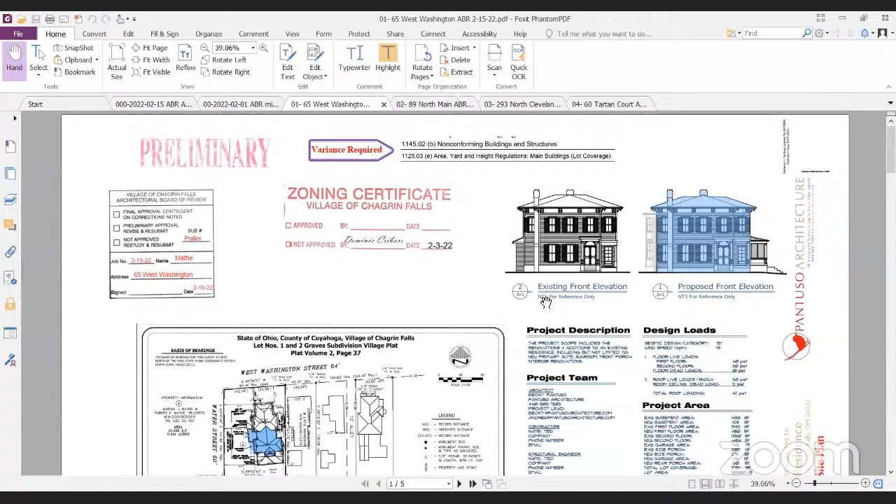So we are trying to find common ground on the additions to 65 West Washington. We've done analysis in the area. I think one of the initial reviews from prospectus didn't like the windows. There were a number of comments.

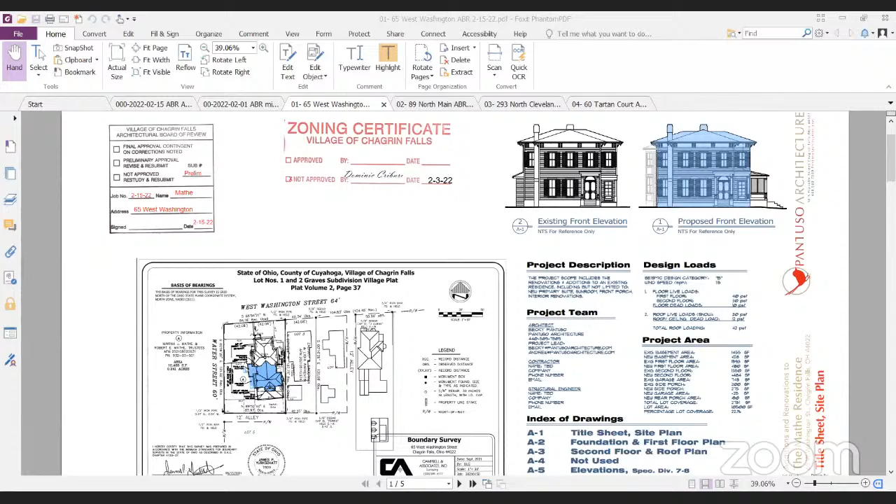We went back, redesigned. My takeaway from that meeting was you just can't do anything to this house, which is unsettling and unfortunate. So I'm really trying to come back with a proposal that takes into account everybody's comments previously. We're reducing the massing, it's stepped down considerably, as you can see from that elevation. We're not adding windows to the existing front, which I still wish we could. I think that's a very blank facade that could use another window, but ultimately heeding some of the comments of the board in this process.

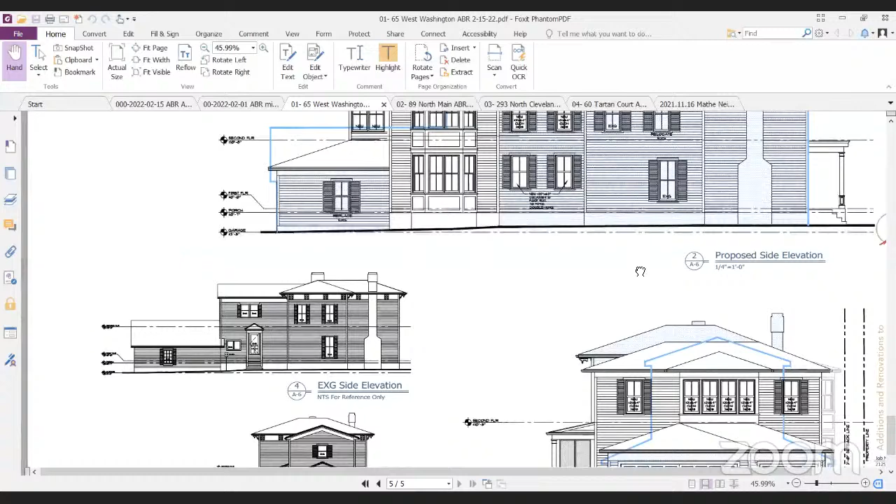Originally we were manipulating the garage, which is in the rear yard setbacks, and then foolishly didn't recognize that required a variance. Immediately, we took that off the table. But the reality is, the massing of that garage may be one of the most troublesome things about the existing house. It's really unfortunate. Sorry for all the background noise here, this zooming.

So really unfortunate, that 3A6 there, elevation. So just going in and trying to create the most attractive project that we could add to this village. And this is what we're coming up with.

I think the comments about the massing are a little bit tricky, because if you look around the village—and obviously I've done some soul searching since our last engagement on this project—that's what Chagrin is. It's like a big house next to a little house. Everybody on the board that's doing work in this village has seen the projects, you have like a $2 million house next to a $300,000 house.

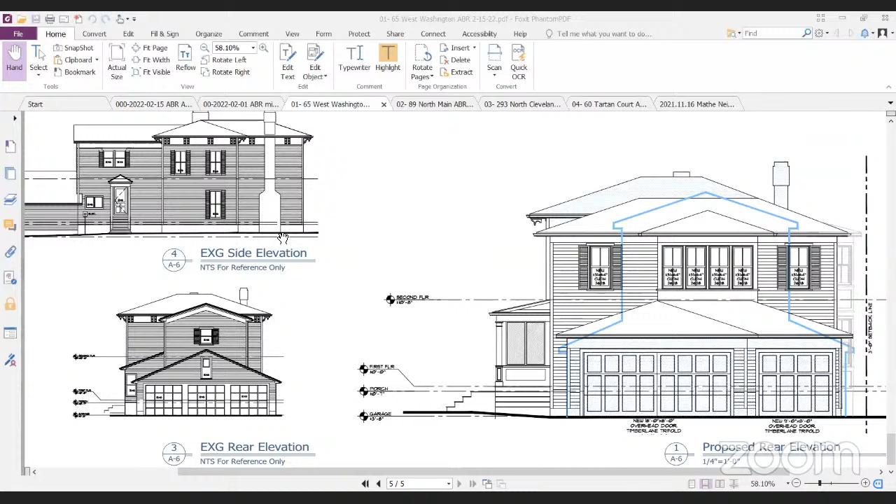And I think if you kind of keep that in the back of your mind, this isn't such a groundbreaking or crazy ask. So I'm bringing all that up because we went around and documented, we created a 3D model to visually look at the two. We did an outline study of this next to the neighboring houses. All of that effort brings us to this, and I'm happy to show you any of that exploration and analysis so that you can see why we've arrived here.

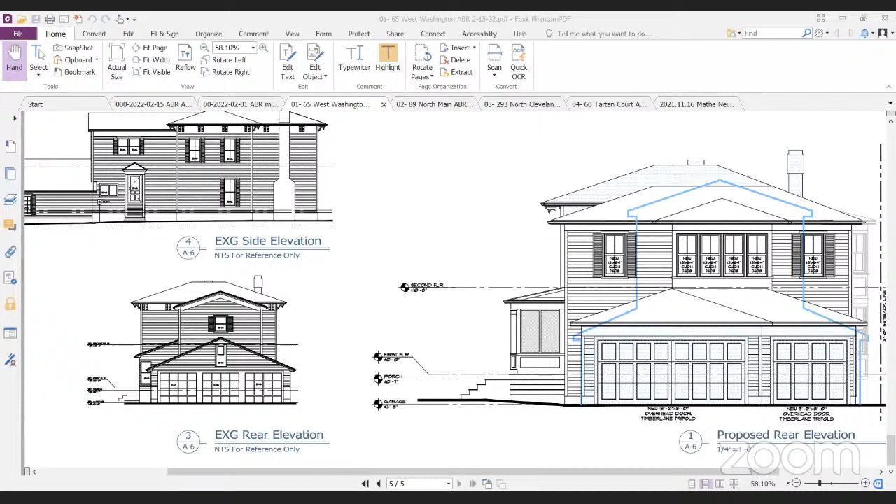But that's what I want to say. And I want to say, as long as each project is treated fairly and equitably, I can't complain about it. There's big houses going up all over Chagrin, so it's hard for me to decide to just surrender and say this one isn't acceptable. I think it's really lovely. I think it's going to be really charming, and we have someone that's actually willing to restore the whole inside of this house that's been unfortunately cobbled.

It's right there, you can see on 1A3 if you hang there. It's been cobbled up into a duplex on the inside. All the ceilings have been dropped to like 8'6" instead of 10 foot. This client is willing to go back in and tear that out and put in the big crown molding and all the things that were originally there. I just hate to see that opportunity lost for Chagrin.

Maybe I've talked enough. Well, I would say that they've shown their knowledge and interest in preserving architecture by the first submission, which is a total rebuild of this house.

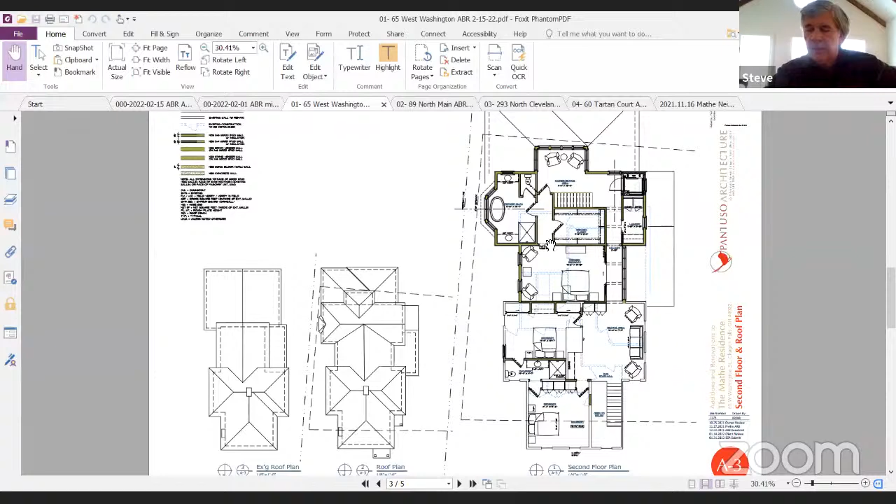And I'm glad they're taking a different tact internally, but we're outside people. Our outside architecture is what we deal with here.

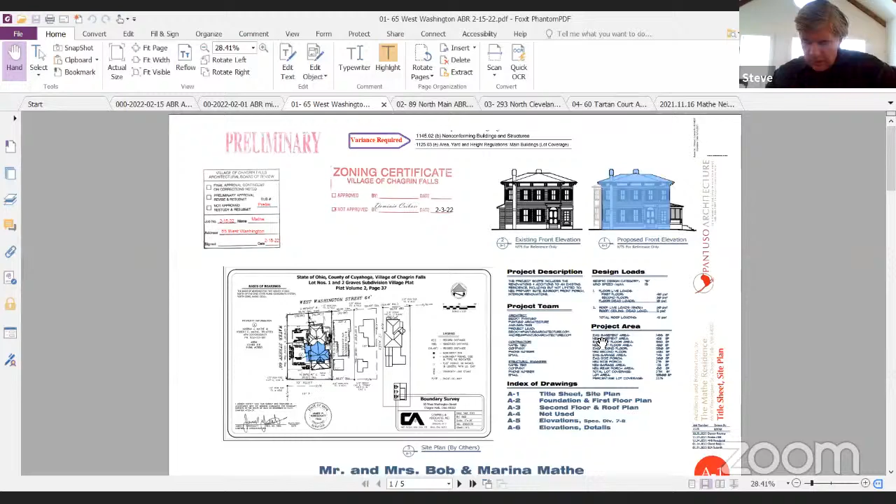Your quote, going to create a much more attractive project out of a house that can be done with the project. I think the basic tenet is this house has been added on to - it's had 4 major additions over a long period of time. Some of them not very noteworthy, and that has nothing to do with you, but we're adding on yet again to, at its time, a grand house. The day it was built, it was a grand house for its time.

And since then, it's been added on to be a grand house for its time several times. I think you're right when you say there's big houses next to little houses all over town, and there's houses that are too big and projects that should have been redirected all over town as well. But we're dealing with this house, and it's a substantial house already. And to try and figure out the best way to add to a house that doesn't need to be added to is kind of what I'm coming to.

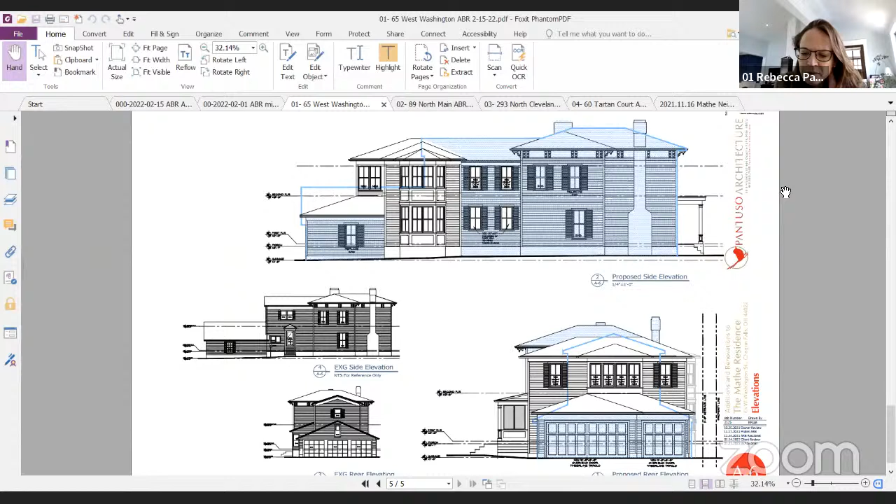Nothing's really changed other than representing it to us. I don't really think anything's changed since the last time. Not true, but not to any degree. Can you go over the changes and maybe touch on the existing and new square footage of the project?

Yep, if you go back up to this, if we go page by page or whatever you want to do, we've dropped... you want to start with the first elevation? Yeah, okay, great.

Originally we had the wraparound porch, which I think aesthetically would be lovely, but is losing some of the historic, the 100-year-old porch that's on the front there. We abandoned all of the windows in this far left side and are not touching either porch, even though in my opinion they're not designed well. So we're holding on to history.

And I appreciate that, but it's sometimes hard because the entablature is not the right size, the overhang is bad, the crown details - all the things that Bill refers to in that Get Your House Right book, they're there. They were done 100 years ago, so we're going to hold them sacred. That's fine, we're heeding your recommendations on that, not doing it.

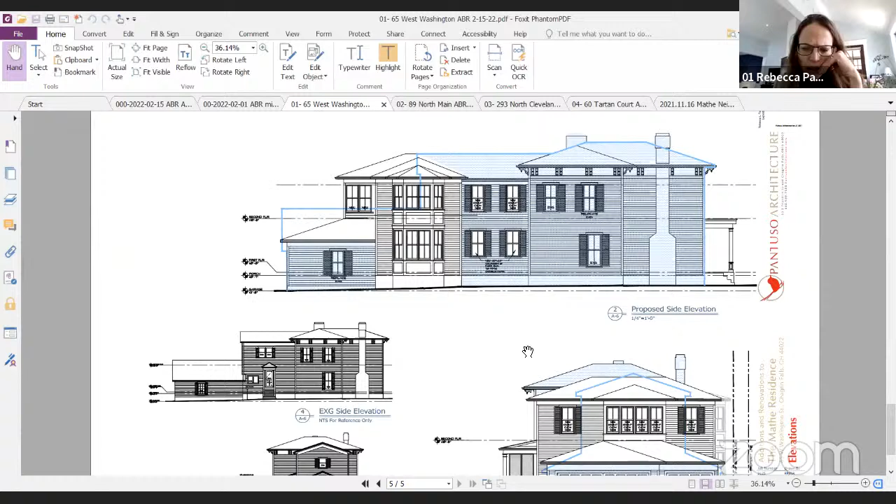And then on the back elevation, where the frieze board is - your or Phil's comment for how to handle the roofline, which we dropped down even more, and then putting that frieze board on there, I think was a good comment you guys made. And then changing the garage doors, changing the roofline, manipulating that alley elevation.

Becky, I really like where your design has gone, and I understand that you may or may not agree with the preservation part of this project, but you've shown, to my mind, a great effort to subordinate the addition, reduce it in scale, break it up in a way that is complementary but not overpowering the original structure.

It's meeting the needs of your client, and fixing the mistake on the end where the garage is, to my mind, a nice solution. It's there and you don't want to change it because it's a 3-car garage, it's useful and it's connected, but bringing that roofline down and hipping it, and adding the bump out to catch that and keep the hip from getting too tall, is, to my mind, very well done.

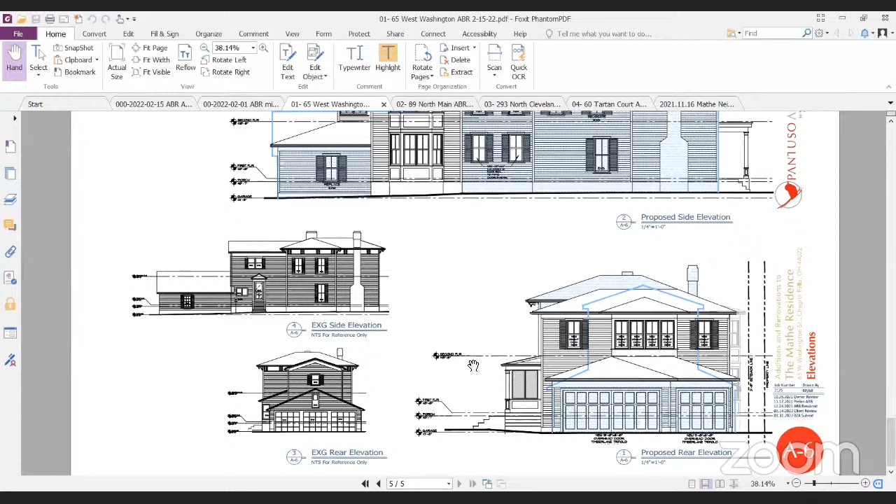So, thanks Phil. And the other comment I didn't mention is on this 2A6 elevation, we took all the windows off of the existing on that as well - we had windows on each side of that fireplace.

Yeah, I like what you have - it respected the historic integrity of the original massing. I mean, that's definitely a big improvement. It obviously helps the board look at this and not get caught up in that aspect of it.

I think there's something that's not right in these two elevations. The roof coming over to that last projecting bay is actually bugging me - the roofs don't coordinate between the side elevation and the rear elevation. In other words, the roof of that bay looks small on the rear elevation, but it's actually a taller roof on the side elevation. There's something that's got to get reconciled there.

But I think the approach to the side-facing hipped mass, doing something that goes sideways like that, kind of mirrors the same thing happening on the main house - the loweredness - all of that works.

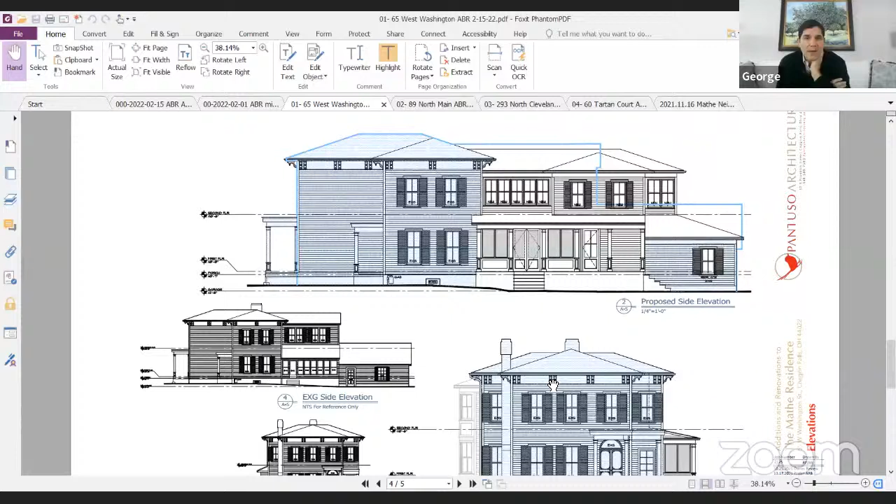And the fact that it's so prominently placed, the side elevation is the main elevation on Water Street. So I think the sensitivity is, and you're respecting the main house at this point in the design - that's important. But I think the sensitivity is that the Water Street elevation...

It's not unrelieved, but what you're showing us there is longer than the original house. So if there was no little back bay and everything got compressed back to like 4 out of 5 of those porch bays, all of a sudden it's just too long - you dropped it, and that's good, but it's too long to feel subservient to the main form. That's what I think Bill's trying to say, that it's still overwhelming the main house.

So if you look at the other elevation coming down Water Street, your back elevation - keep going - let's see, if you look at where you have outlined in blue, look how wide this is. What is that, 40 foot or 36 foot? It's super wide there.

And you're gonna feel that when you're coming down the street, how massed that is and how long it is. And the house you're referring to across the street, that probably contextually fits because that lot's 150 or 200 feet wide. This is a 50-foot wide lot in the front, but you're comparing the front elevation to the side lot line.

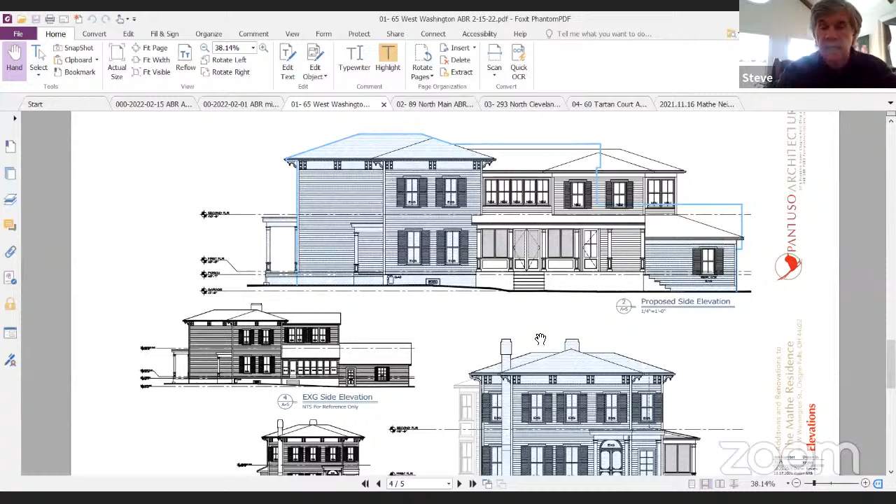Substantial change, and the question is, what is too much? That's the summation of last time's decision: this is just a little too much. Very well done, a little too much. And I'm trying to quantify that.

To me, the 5 bays of that porch are too much. I feel like the porch is 6 to 8 feet too long. I think the 5 windows ganged between the existing house and the side-facing hip, that's too long. It should be 3, or it'll be too squished. Or 4. If that thing slid back 4 feet and you didn't have that glass bay, I think all of a sudden this thing is better.

So I'm just trying to quantify it. Like the porch is 6 feet too long, but the mass is about 4 feet too long, and all of a sudden it'll start looking shorter than that house, and it's going to be a good thing. But right now it still looks equal to the main body of the house. It's doubling the house. The old one was only two-thirds as long as the house, and that's the difference.

Tell me what you would do with the garage, George, because you're not addressing that as part of your comments. To reduce that gable, I need to hip this. In order to hip this, I've got to build something over it to make it work. You're shortening it because you're still going further — even if you followed my suggestion, you're still going further than the existing addition, so you're shortening that thing.

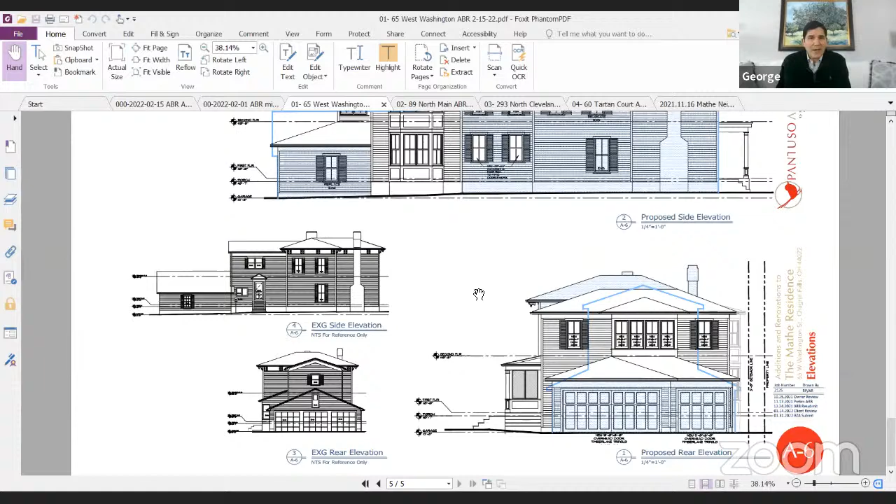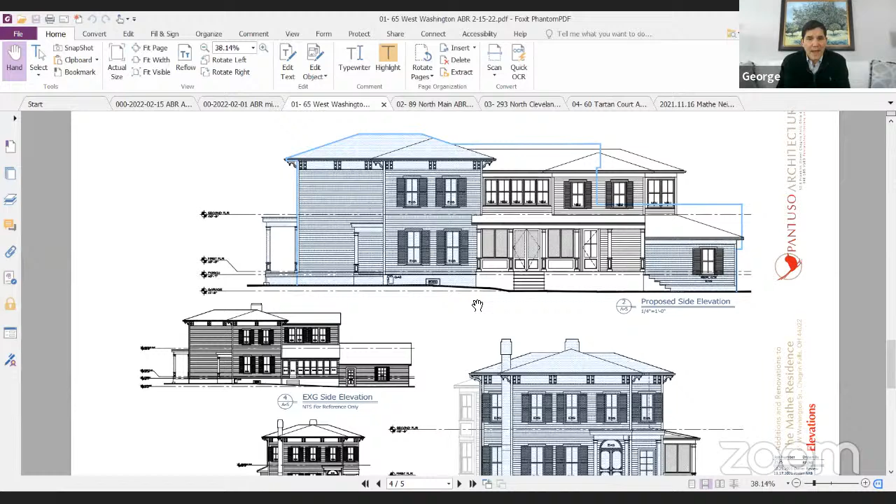That length you're seeing that solves this whole garage bay is set back like 18 feet, and it's like 60 feet from the road. I'm saying you're still making that 2-story addition too long and the garage a little too short, but it's just a matter of going back and tweaking - hopefully this client can make a room a little smaller. You never answered the question of what's the square footage of this proposed house. We will see if she can reach that solution another time.

I move to revise and resubmit. A second. Motion by King, second by Childs.

Lutz, can I ask a procedural question? Sure, I'm sorry to interject, but it has bearing on this. This has already gone to BZA because I need to acquire a variance for improving this garage.

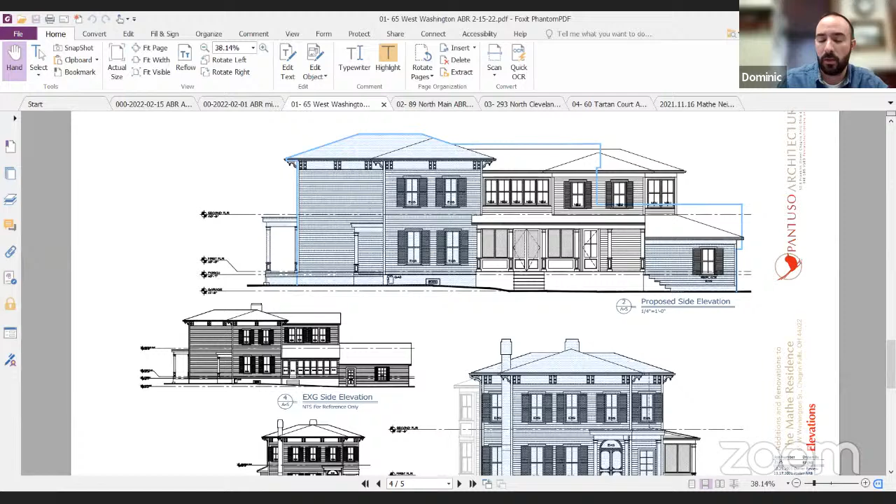Your revise and resubmit, how does that impact that next step? You're still going to proceed to BZA for the variances, and with the comments made from the board, they'll take the minutes of this meeting into consideration. If any board members want to make comments in their motion to the BZA, now would be the time to do it.

I think we need to make sure all the minutes from the last 2 meetings are handed off to BZA so they kind of understand and follow the sequence. That's of paramount importance. Revise and resubmit isn't a decision other than to see it again, so I'd love for the BZA to listen to these comments. I think it would be helpful.

When it's on Zoom, they can watch the whole damn meeting. I think it's important that the motion includes the things that we think could be done to make this addition better, and I think that will make a different motion than the last time this house came before us.

George, would you say what we think the garage needs to be - a different slope? Because I still want to know how you're thinking that's resolved. Everybody agrees there's another way to do it besides building over it or shortening it, but I don't think that's a good discussion for today. I'd be happy to talk with you about it anytime though.

Carry on, so I want to go back to the motion to revise and resubmit. Motion by King, second by Childs. Lutz, aye. Before you do that, I just want to make sure you get the minutes in for the last two meetings while we're revising it, because we're going round and round as we should.

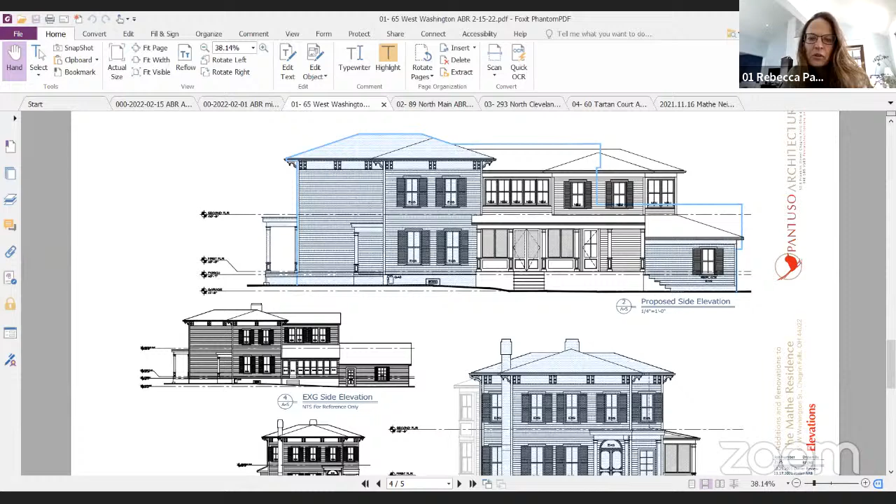We looked at this, and I'll show you all the ugly options - excuse my language - that we can do that offline.

A couple days ago we had 2 inches, and it covered up all the soot, all the dirty snow. Who are we listening to?

So we need you to revise and resubmit. We obviously have made mistakes in the past, and we don't want to build any more ugly stuff. So let's revise and resubmit.

I'm calling the question. Second it. Is that what you're asking, Steve? A second for revise and resubmit? Yes. I think we already had it, actually. I'm calling the question, meaning we need to vote. Motion: revise and resubmit, motion by King, second by Childs. Lutz, aye. Childs, yes. King, yes. Thank you.

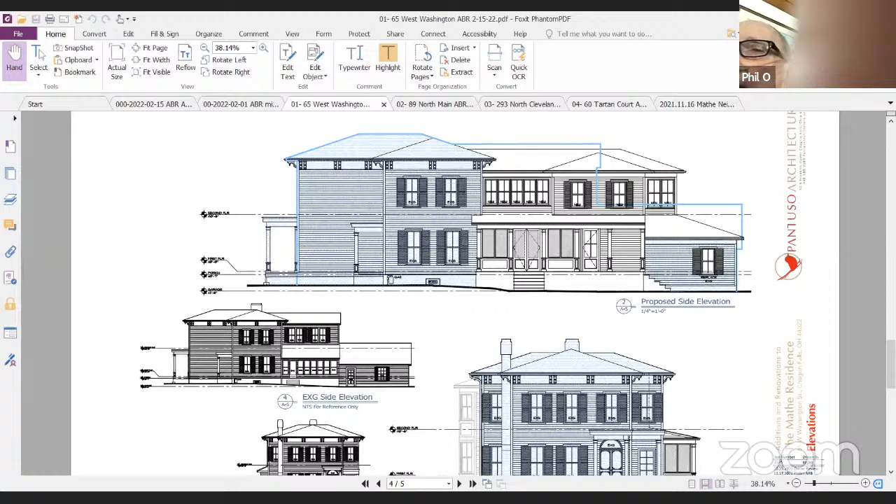89 North Main Street, Elite Sotheby's. You fill in, I have him muted. I didn't know if he clicked it, I didn't know if he joined the meeting.

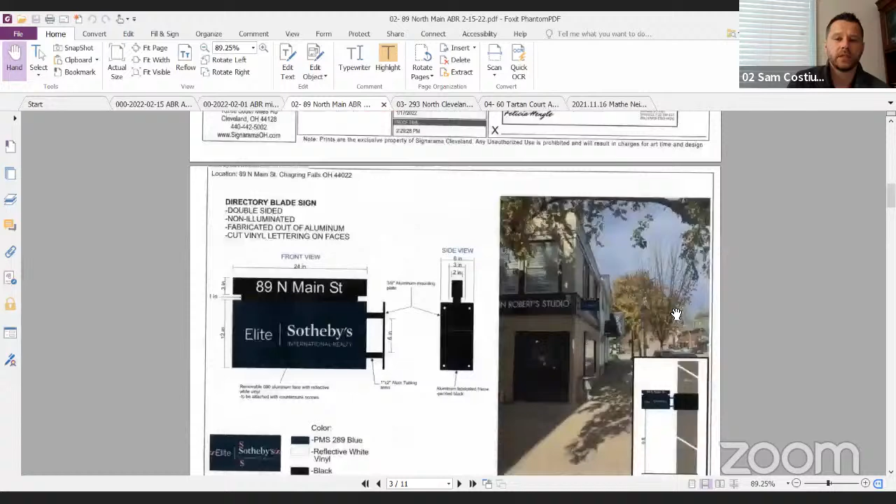Can you hear me? Yes, we can. Please continue. My name is Sam Costiuk, I'm with Signarama, the sign contractor for this project. We're proposing to install a small panel sign by the entrance door of the new Elite Sotheby's - a non-illuminated aluminum panel sign - and also a directory sign facing Main Street, also non-illuminated aluminum construction.

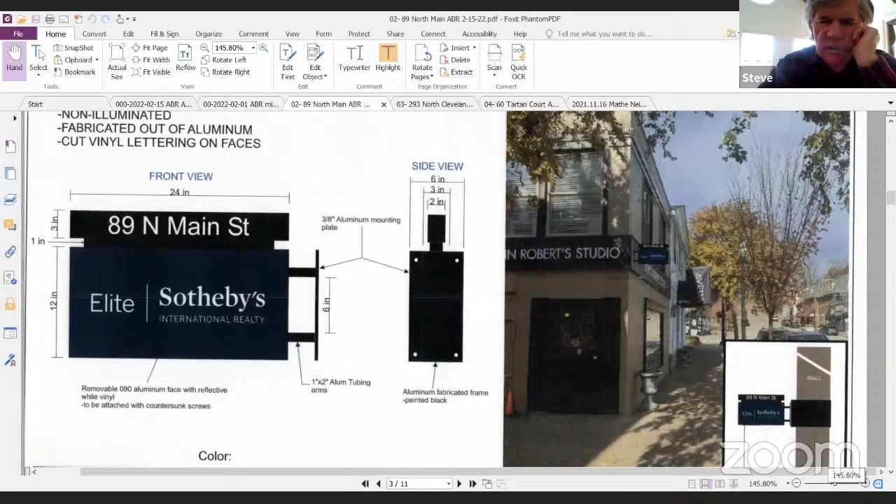So you're replacing the John Roberts studio sign? We are not, it's going underneath it - well, not exactly underneath it, it's going on the corner of the building, right here. It either needs to go on the sign or above the sign, because they measured underneath it and the lowest point would only be about 7 feet 6 inches, and we need at least 8 feet. So that's the lowest it can go, or it has to go above it for zoning.

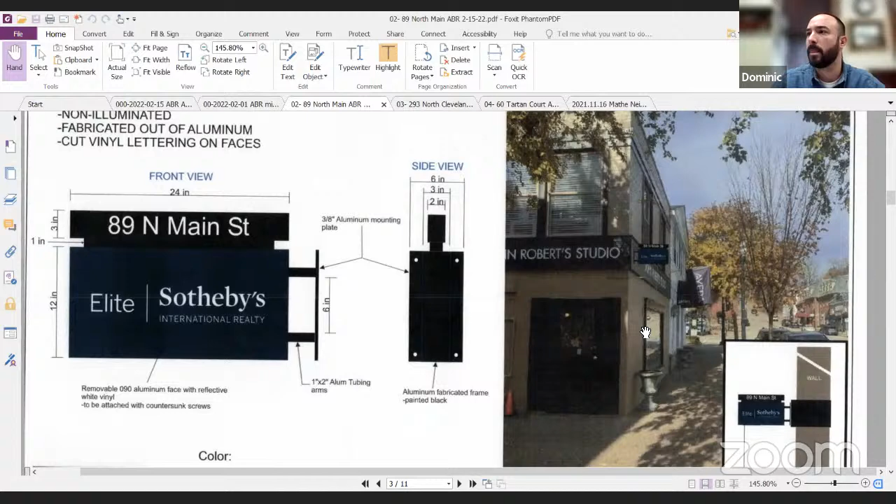I think the sign's a little boxy. Could you make it more of a panel sign rather than a box sticking out? Is it like 6 inches wide, projecting out, or am I misreading that? It's projecting out over 24 inches.

Is the sign blade 6 inches thick, 12? No, I think in this rendering the mounting plate is 6 inches - it's hard to see because of the darkness of the color. Is the sign 2 inches thick? The depth of the sign is only 3 inches. 3 inches, okay, okay.

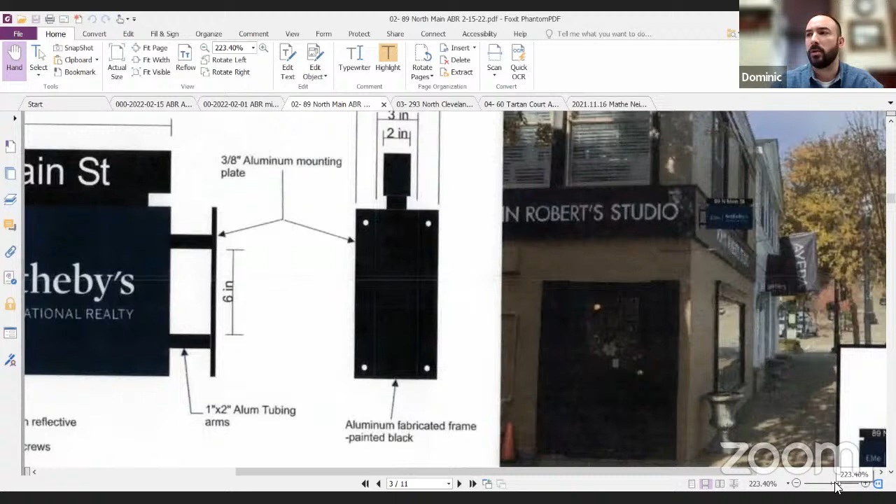If it moves, it feels like it needs to move up, but I almost feel like it needs to be bigger if it moves up. It can't be any bigger because of zoning. It's got to be a 2 square foot directory sign.

What if you put the bracket above the John Roberts sign, but then arms came down so the sign could be at its current position, suspended from above the John Roberts sign, not attached to it.

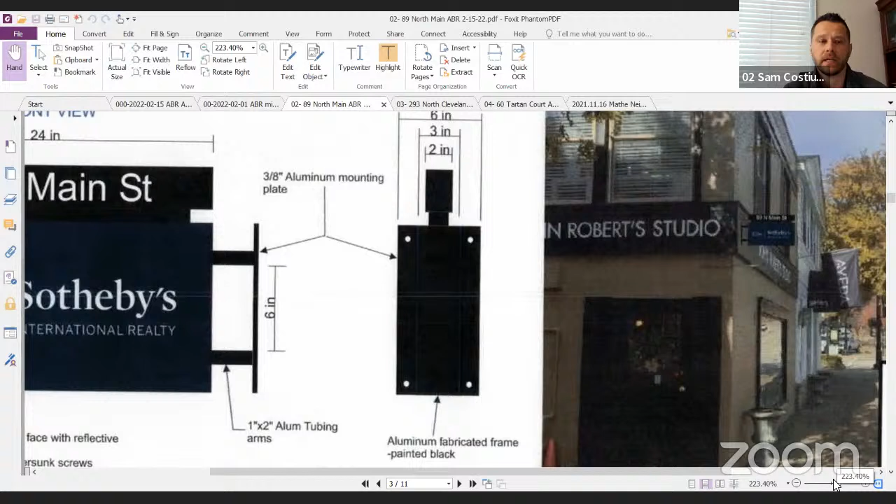We had actually gone through many different designs, one being more like a scroll bracket that hangs above the sign with the panel hanging underneath, but the client rejected all those designs. They wanted a more high-end, slightly more modern look to the sign, maybe a bracket that's not a scroll bracket, something more modern and geometric. They just didn't like the whole panel hanging underneath.

I believe there was another sign or two with a similar approach where it wasn't hanging underneath some sort of bar. Up and down Main Street they had seen this and wanted something similar. I think the other problem the client was running into was their sign needs to go through corporate first, and they were getting a lot of pushback from corporate on some of their other designs that we had recommended.

So did corporate approve this? Yes, yes. It's small. We agree, but according to zoning this was - we had actually submitted a larger sign, but it was shot down by zoning, and that went to the board. I mean, it's not going to be a big thing up there.

I hate to move it up at this size. I mean, it's just going to look odd if it's way up there. I agree, so maybe this is the best solution. Yeah, that's kind of what I'm thinking too. I mean, it's not offensive. No.

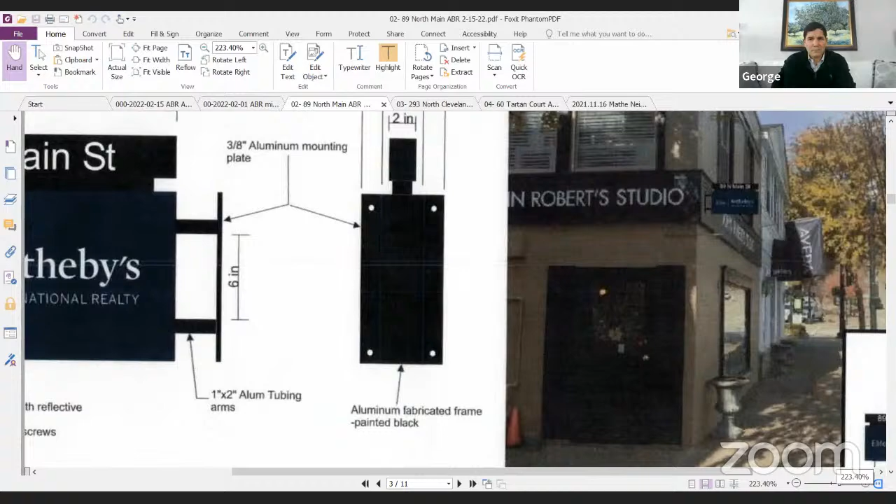It's kind of too bad because it gets a little bit lost in the John Roberts sign - they're so similar, black on black. And it also blends in, so not bad from our standpoint. There's also the sign on the back, might be a little confusing, but I don't object to the design of it.

I'm sorry, Dominic, you were saying? Oh, I was just mentioning there's also the sign on the back, on their main entrance on the alley side of the building next to their door. I just want to make sure you guys had comments on that too.

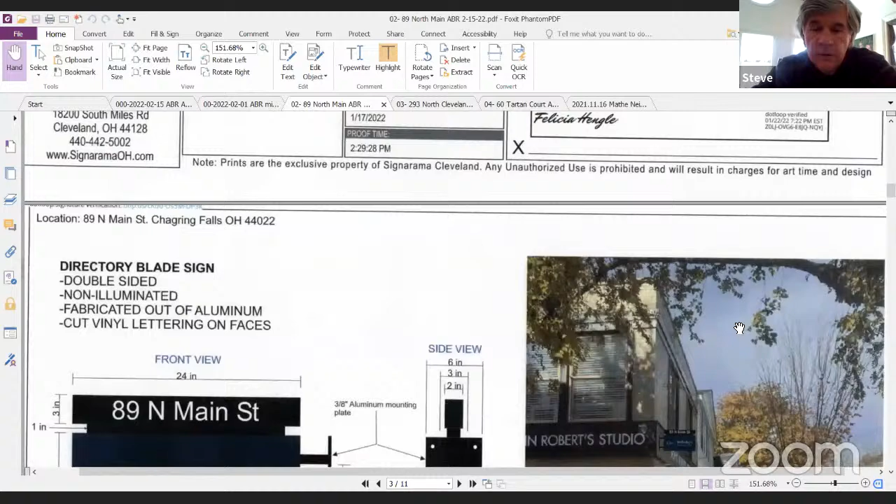It's unobtrusive also. I mean, I would approve these myself. I think so. Yeah, I agree. Me too - it's confusing, but appropriate.

Are you saying we're appropriately confused, Steve? Well, I was for a long time because that bracket thing, I couldn't figure out what that box was, and it's just the bracket on the wall.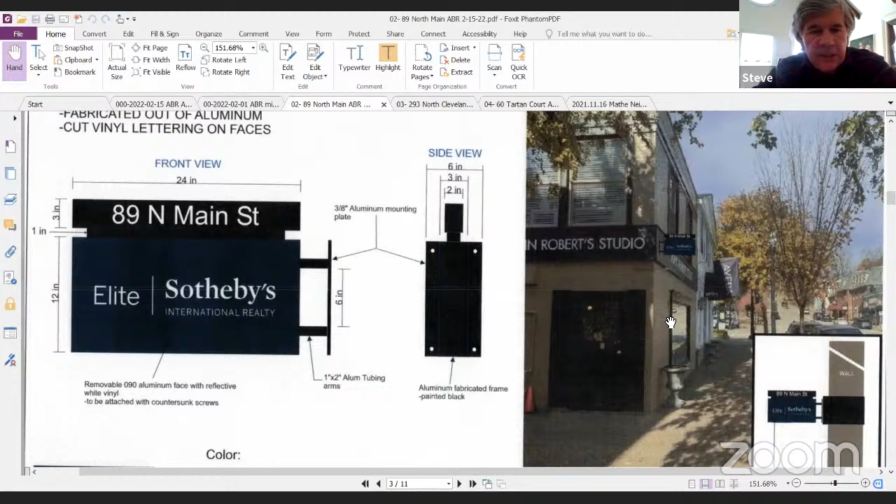I moved to approve as presented. Second. Okay, motion by King, second by Lutz. Childs, yes. King, yes. Lutz, yes. Thank you, that was easy. Thank you.

293 North Cleveland Street, new dwelling.

Remind Bill, you got some plan review. Lauren and Rodney, are you on tonight or this afternoon? Morning. I'm not sure I see them today. I see Lauren Sonkin is on here. Jeff Sockett's here too. I am, I was muted. Okay, that's fine.

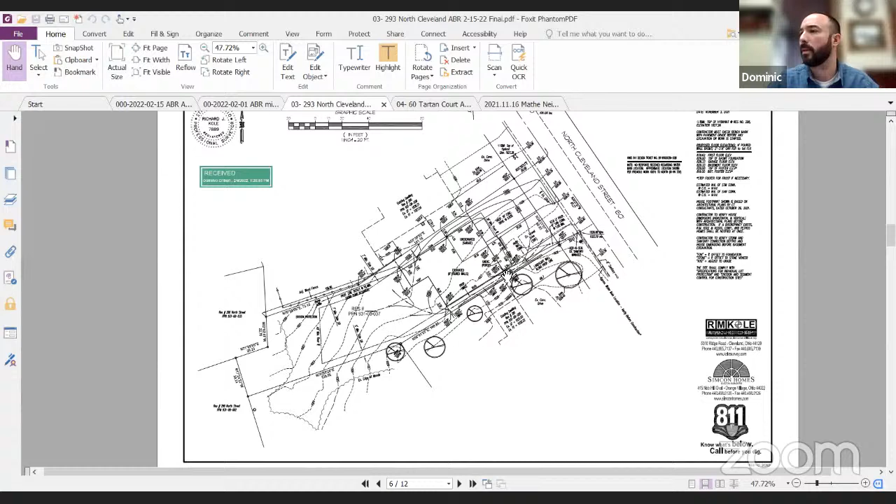Just some comments on this, just for you, Bill. We did receive a plan review response from RSA. I'll be sending those out to you after this meeting. And also the engineer is still writing up a response for, I believe, the drainage. So those are forthcoming here soon.

Dominic, thank you, we understand that. Just bear with me a second.

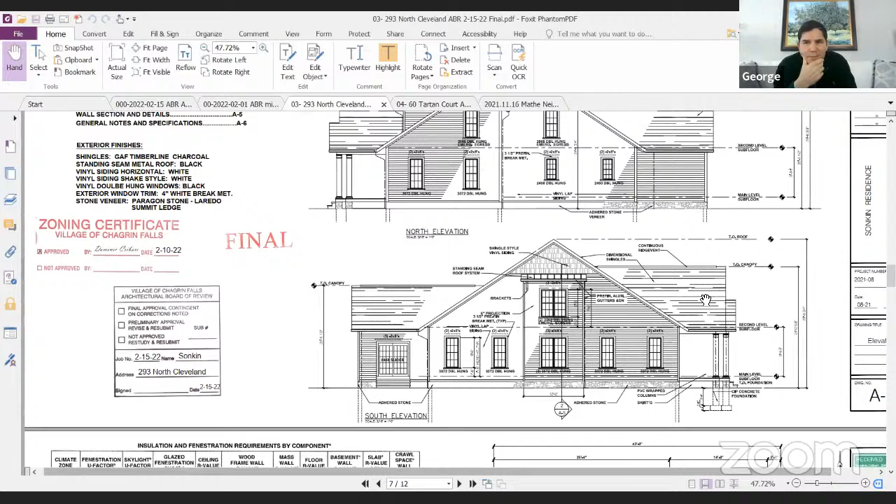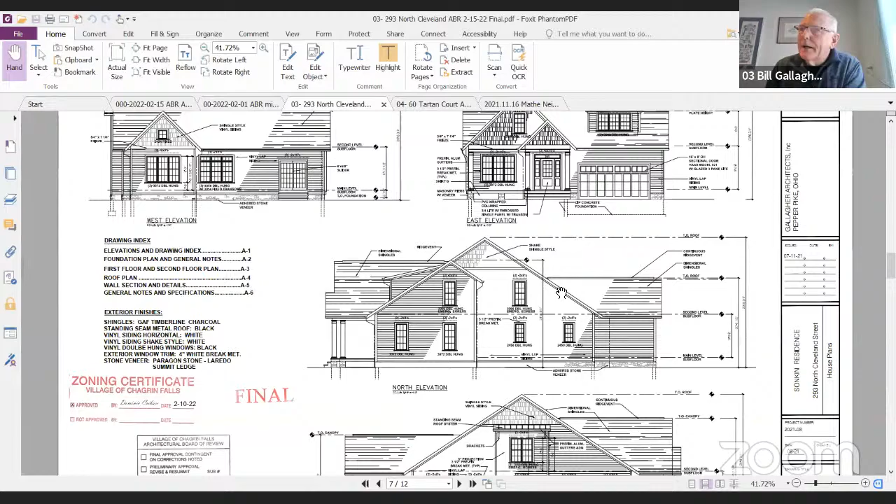We've looked at this design at a number of meetings and really appreciate the opportunity to discuss some of the changes. I'm pretty confident this is exactly what the board has been asking for as far as the exterior and materials. We did submit a color palette, and actual samples were also left at Village Hall for the board to see.

The last comment, which was a major one, was to get more definition of what the materials were on the drawings. We understand that—it was simply because we're still evaluating and costing things out. After some long discussions, and since our last meeting was probably January, we came back with what was selected by the homeowners and wanted to present these.

Now, that shake siding is actually white. I'm not sure why it shows up so taupe in this—I think it's just the lighting of the picture, and it's picked up some yellow. The stone is also a natural stone base that's going to be associated with that.

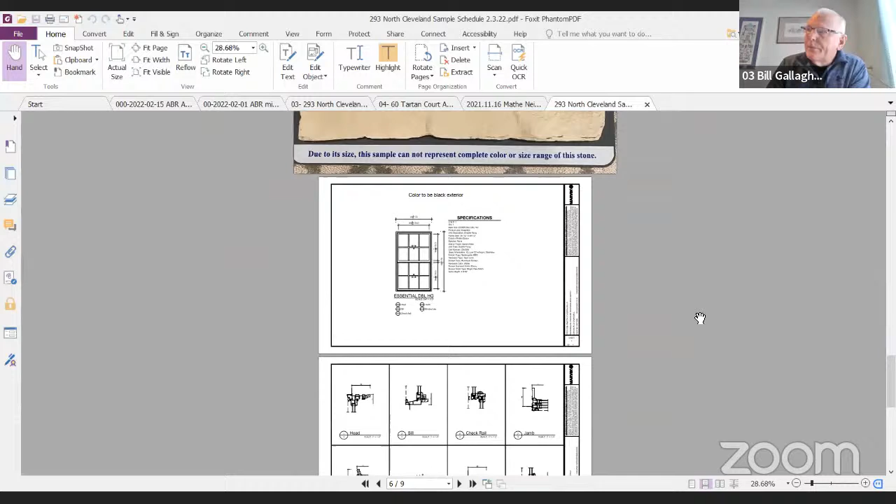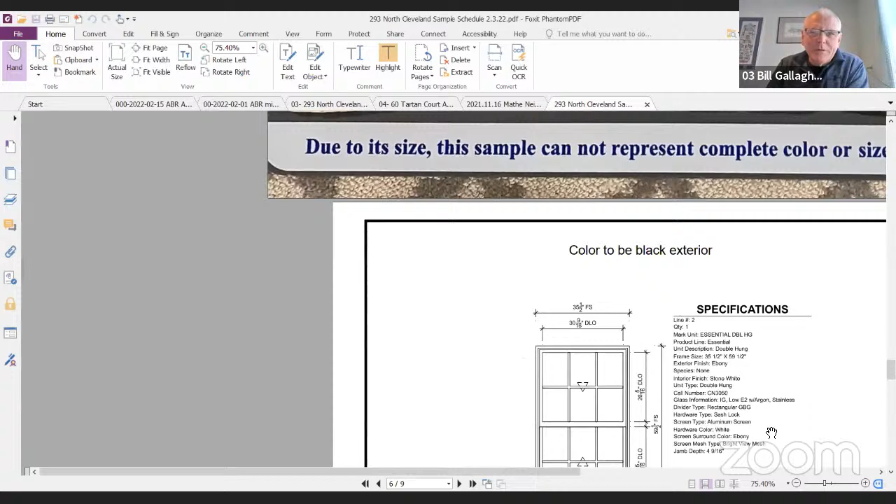We are putting in fiberglass windows. One point of discussion I'm sure we'll have, so I'll bring it up now: the homeowner, particularly the wife, Lauren, is very strongly opinionated that she wants black windows. We can go into those discussions later, but I'm just telling you up front.

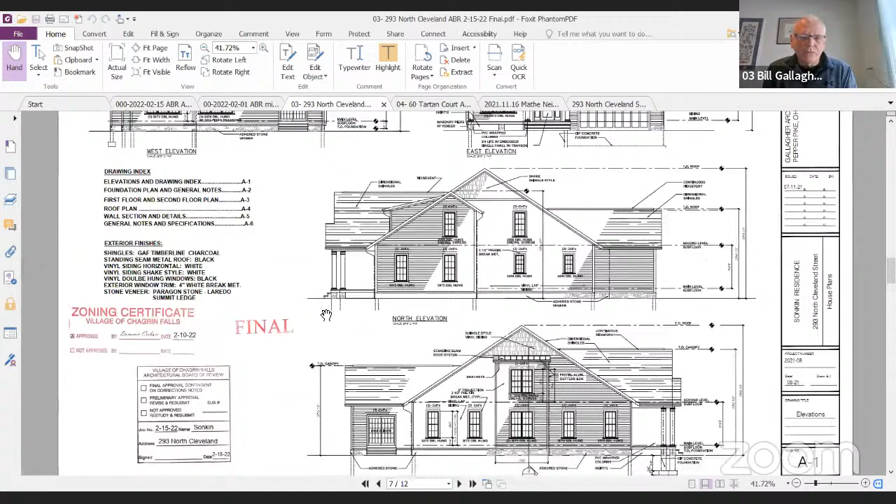Secondly, the roof design used to have a couple of gables, and we needed to tie everything back together, so we changed that to a shed roof at the last meeting. We've decided to go with a standing seam metal roof that will be a complementary black color to work with the windows. On the west elevation and south elevation, we put a standing seam metal roof over that small projection to give continuity throughout the entire design.

The rest of the house—the trim, garage doors, possibly the front door—we haven't discussed that color yet, but everything else is going to be white. We're hoping this is what the board's been hoping to see and asking for, and we're here to listen to your comments.

So the metal roof is only on that little shed roof and the front-facing dormer, and the right-facing dormer. There's a shed roof on the front, and then there's a shed roof on the side.

I'll go first. My comments are, first, I'd like to thank you for taking all the time. I know you've been here two or three times, tweaking and working with us, so I do appreciate you doing that.

My only comment, because it's the front elevation, is that you have a lot of field right here—I think I brought this up at the last meeting. Is there any way, with all this distance here, to either bring this roof down—let me try to draw this—so you could put a beam here with a bracket and a bracket, so it doesn't have all this height, or put a small hood over here to break up the facade, since it's an important one. Maybe even a small roof out of copper that goes across, comes down with a bracket, so it breaks up that large mass of siding above. But other than that, I think it's a nice job, and thank you for taking the time to do it.

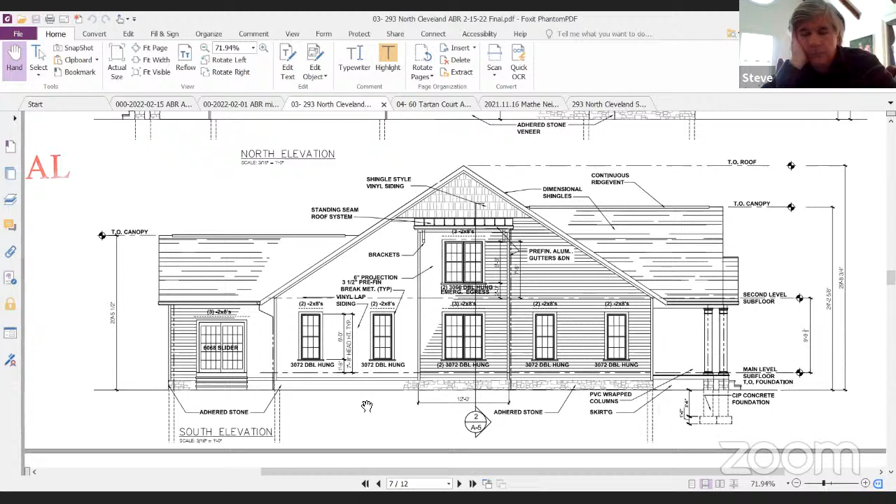This side facing gable still feels pretty wide to me. I guess that bay feels a little wide on that side, but it's certainly become much more consistent. It faces an equally long, not terribly articulated house next door on this side.

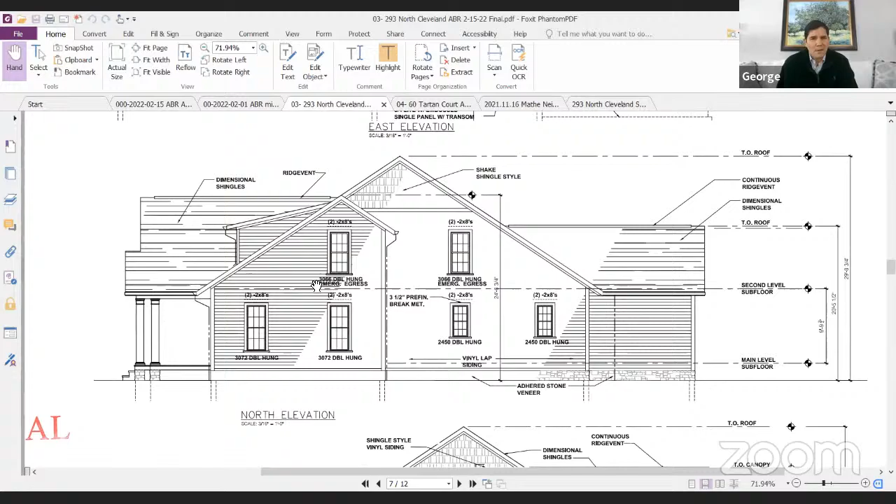So I don't think there's a lot you can do with a house this big on a 60-foot lot, and it's not really even a 60-foot lot. I'd like to say it's much improved from the original presentation.

I agree with Bill, if there's something you could do to break up that space between the top of the garage doors and the roof line, to give that some relief there, that would be beneficial. Dominic, could you go to the...

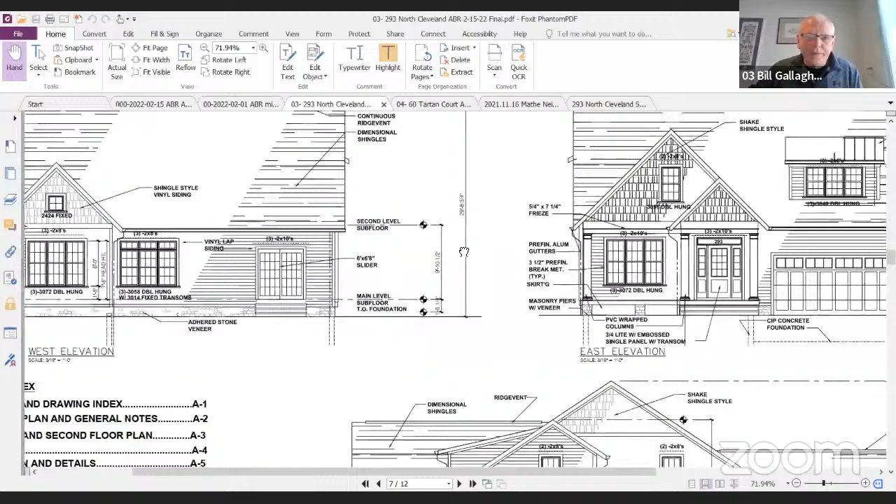North elevation, I'm sorry. I mean, your comments are great and I'm not at all trying to minimize them, but in looking at that elevation, by projecting that roof and having the gutter board not align with the porch, honestly, it's bothersome to me. I understand what you're saying, or then we could step it.

Okay, so then we step it, and then where's that awkward step happening at? It's going to happen somewhere in the middle of the garage door, and you're going to stare at the end of it on the porch. Even again, good point. And then it becomes a problem.

I think if you just - I agree, maybe it doesn't make sense to make that this right here. Let me just annotate real quick. Instead of bringing this side elevation down, maybe that's not the right answer, but maybe what you do is just give that relief to that elevation - maybe you do a simple little hood here with a beam, and then you put a bracket here. And even on the side elevation, it gives it a little charm and character.

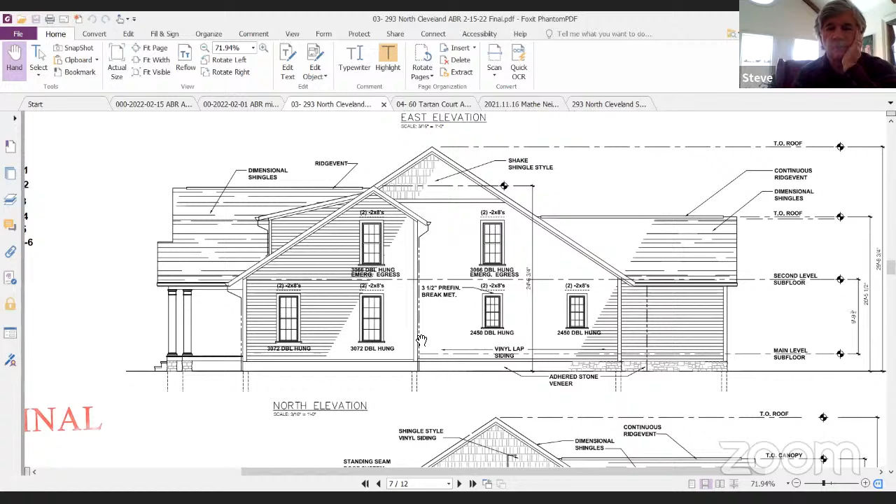The samples for the shakes are at Village Hall, but what are they? Is it vinyl? It's shake? Vinyl, okay, it's just siding, vinyl. Vinyl siding, vinyl shake.

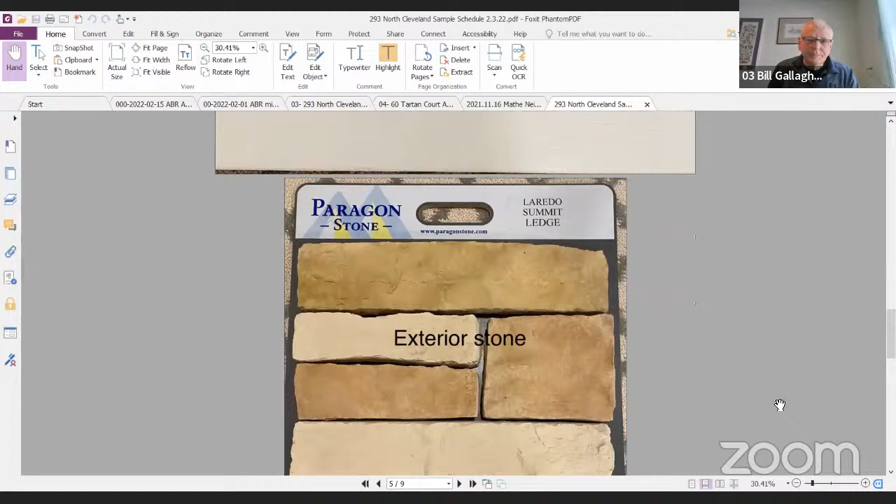The design is well done, and would look very nice in town, but with the material selection, I think it's going to look like a plastic house.

We appreciate that comment. Our adjacent houses are vinyl, and I think it fits well into the community, especially this neighborhood. I do know the owner has said to me over and over they will consider it, and it all comes down to the cost. Unfortunately, that's one item that may add substantially to the cost of the house.

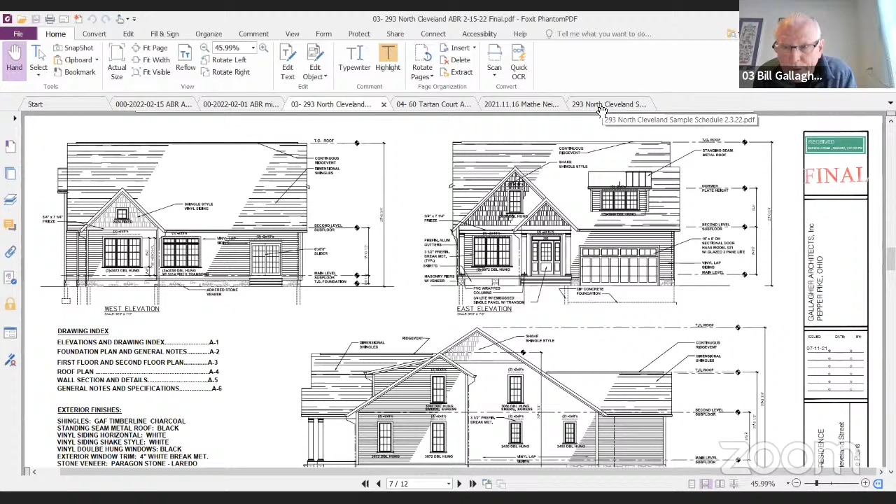Do you have the window casings called out, and what are they? Yes, we do. If you look at one of the notes there, it's brake metal, 3.5, pre-finished. So you got aluminum wrapped, but you have 3.5-inch trim. Then what's the subsill?

It does look like it's a subsill, which I'm glad about. Yeah, the subsill is part of the window system. It is going to be aluminum wrapped also, and obviously the windows are fiberglass. So can it be like a sloping 2x aluminum wrap below? That's pretty typical aluminum wrap detail, 2 inches thick, 1.5 inches thick.

Right now we're not showing the skirting underneath it, simply because it's more of a traditional design. I don't mean an apron, I just mean the subsill itself. If it's aluminum wrapped, there should be something there - it shouldn't just be the bottom of the window.

That will not read - I mean, your drawing actually shows a subsill, but I'm hoping it has a little presence. I think you want it to be thick enough. I think what George is saying is, when you do a sill like in traditional houses, there's a little bit of slope here, and there's usually a kerf or a drip right here.

It goes back, it comes here. Usually this distance here, from here to here, is usually 1.5 to 2 inches. Again, it just kind of gives it the character and feel of an older house. Isn't that what you're trying to describe, George?

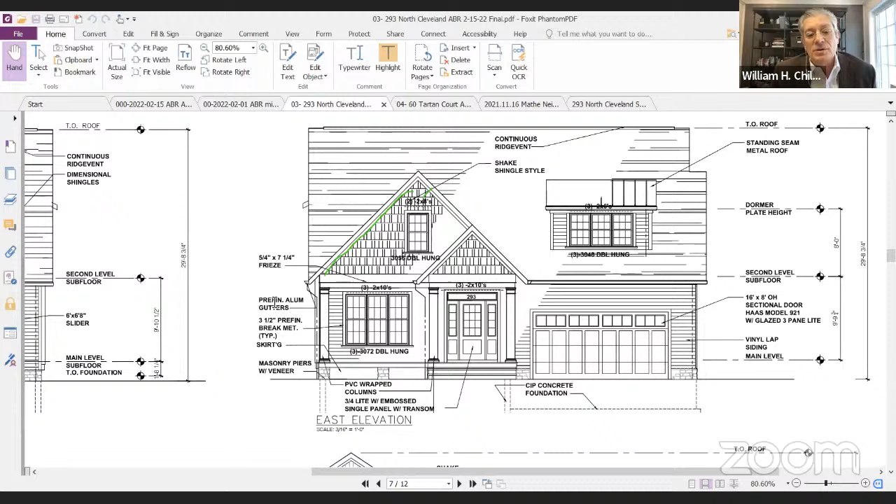So if you do go this direction, I highly advise you to really think about all those details, because you only get one shot at it, and after that you're going to be looking at it for the next X amount of years.

We're actually here to approve certain things, and we don't need to advise. I mean, how will it be built?

I agree, Rodney. You can see there are corner boards at the corner. They're probably not as prominent as shown on the reverse shed dormer. You can't see there's a rake board there because it's projected, and behind it you can see the rake board at the gable that Bill was showing. You'd see how it terminates down at the frieze.

I agree with Bill, you don't want J channels at the terminations. We do have complete wraps around here, so it is, in my opinion, appropriately detailed out. There are no J channels on this house - I don't see any on the drawings. I can't imagine where they may terminate.

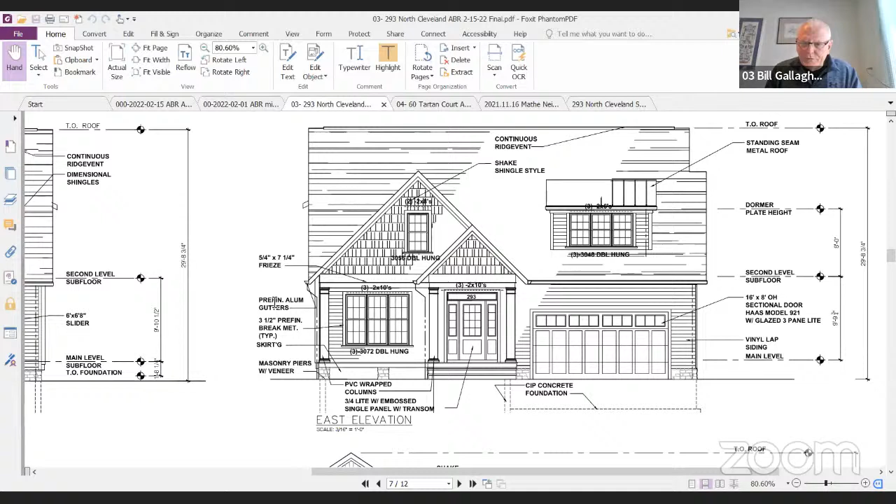You can see there's frieze boards up there. It's going to terminate against the frieze boards. You can't see them because it's hidden behind the projected overhang. We do not have a speculation.

I mean, these are plans, we're trying to approve a house that's going to be built.

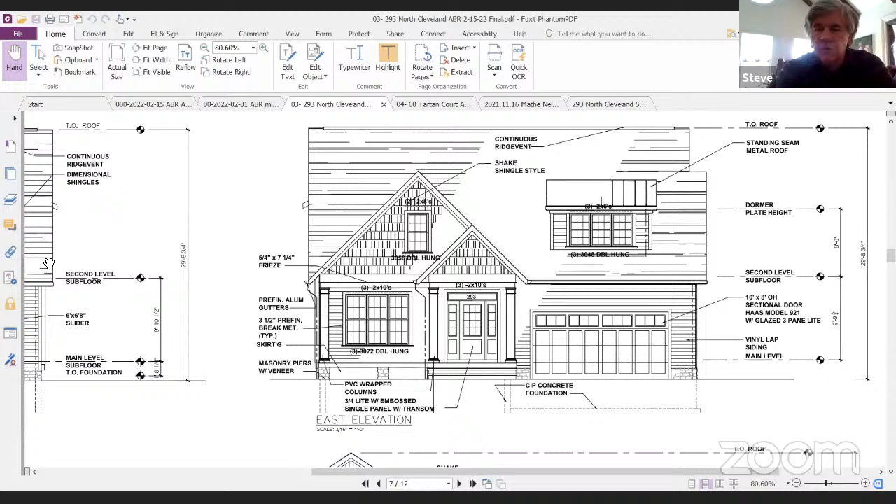I guess I want to hear what the glass is going to look like, and whether it's going to appear like a house on the cheap. You're trying to go down to the details in the drawing set - is that what you're asking? Let's look at the details in the drawing set if that's what you're looking for.

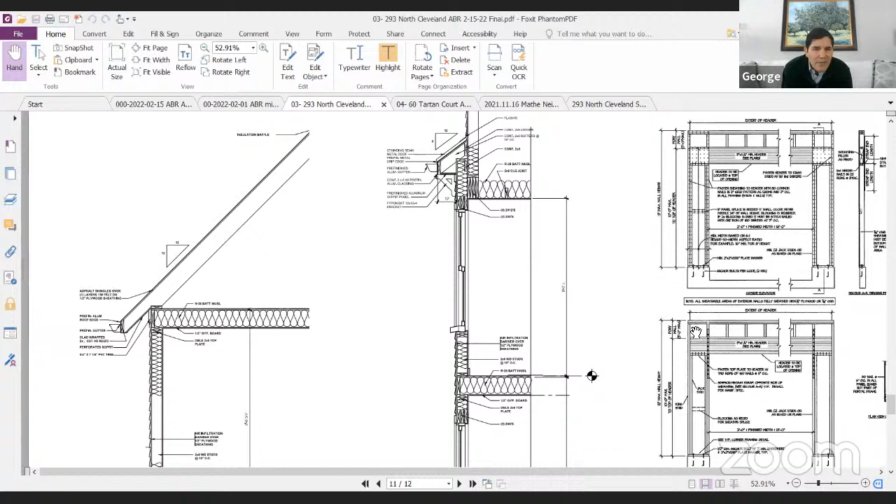Can you go back to the wall section? I'm sure we don't have any details specifically showing what you're asking for. There's a detail on the window corner boards - it does cut through a window. It cuts, and then I don't know if we have a rake projection shown. We do have a frieze board shown below the eave.

Right, and you do show that we don't have a horizontal soffit - we're basically cladding the underside of the rafters. There may be a J trim there because you have to terminate it against the frieze board somehow.

That bracket - you've got a pre-finished aluminum soffit panel, which is not great, but then what is that bracket under?

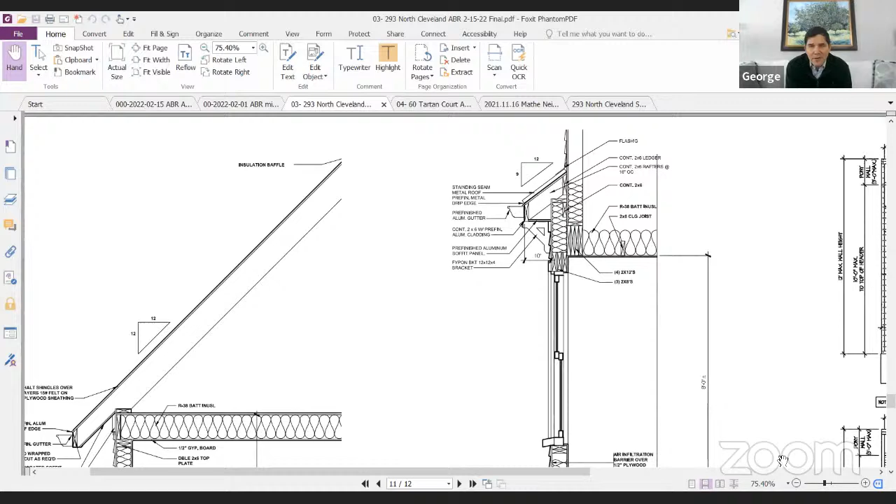Well, obviously it's a Fypon product that's called out, so it's a manufactured system. I don't have the product number identified. We can provide that, but I don't remember where it is on the house. It's that shed dormer - the two-story dormer that sticks out on the side elevation, George. Got it, thank you, yes.

There's a 6-inch projection on that side elevation, the west elevation, to break up that detail a little bit. And then we picked a manufactured product to trim it out a little better.

I guess I'm looking for some confirmation from perhaps one of our architects on what the installation is going to be. These means - the vinyl trim siding can be done many ways, and some of it's just not very appealing. This is a cute house, but with materials involved treated wrongly, it can end up being less cute than it should be. This is more treated in a typical way based on these drawings, excuse me.

Aluminum soffit - there would be a J bead on these, and as drawn, there's nothing showing. We're doing aluminum wrap trim, which doesn't allow for some of the trickier details with the siding.

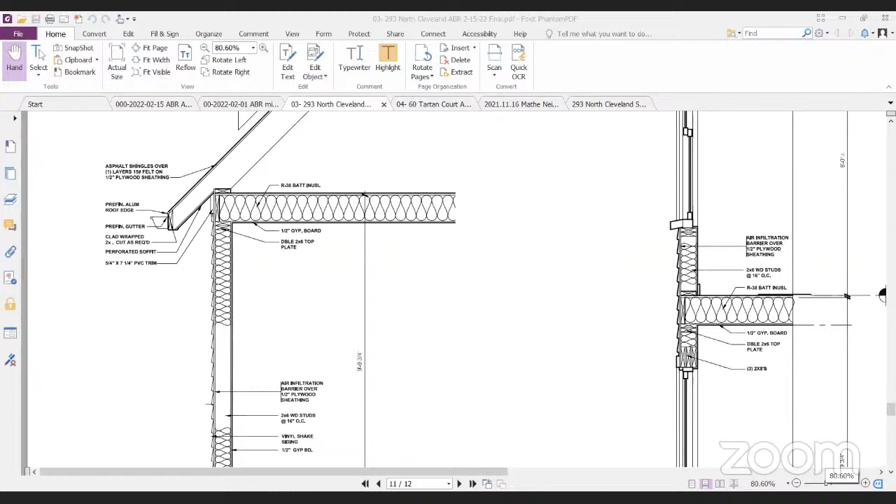That'd be great. So when we do the wrap of the casing around the window, and I understood everything you were saying about the sill, and I heard Mr. Child speak about maybe a pre-made AZEK sill. That is definitely something I would look into as well. I'd like to try to use something like that for the sill, and I do understand the thickness you were talking about going to 1.5 inches. And as far as the casings around the window, you wouldn't see any type of J trim coming up to the casing. The casings would be bent, and the siding would tuck behind the casing, as well as going into the frieze board as well. You wouldn't see any J trim as far as that was concerned.

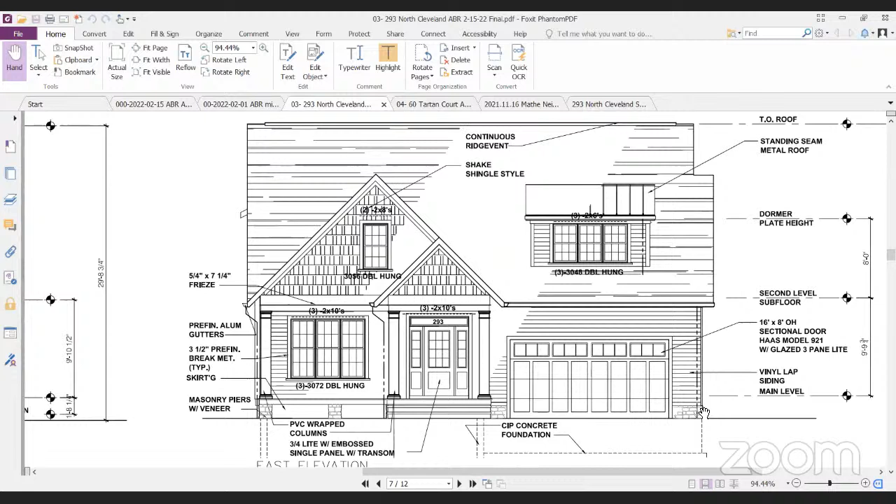Great. If you can do that and use a 1x4 as a base and project that out beyond it, and make maybe the overall dimension 4 to 4.25, it'll look even better. You mean around the window? Right. The trim around the window is deeper than the siding itself. Like I say, it'll project out. But the width might end up with that detail you're talking about, that little projecting trim nose that's going to pick up the soffit. Maybe you can make the overall dimension of that 4 to 4.25. Whatever you guys decide as far as the width, whatever's on the plan will do. Well, I would think 4.25, 4.5 would be perfect. 3.5, but anything over 4 is better than 3.5. That's fine, a 4.25 would be fine. Well, that's helpful because that is going to eliminate the J bead.

Do we want to go make a motion for the project? Well, I guess, do we know what the project is? Because we're waving our hands and verbally... No, I think designing the house. And things have a way of slipping away, as we all know, when it's only.

Steve, I think that was very helpful to define those casing details. Okay.

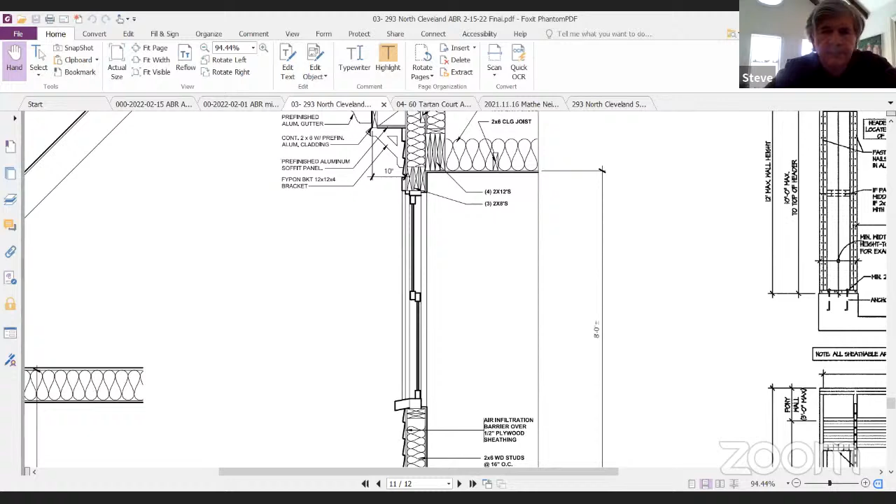Yeah, I agree, I mean he sounds like he's gonna try to eliminate the J channels, and you're gonna do a smooth siding, Rodney, so it looks like real siding. I'm not actually showing a smooth siding on there, it does have a texture. I don't know my options with the smooth, so I'm not going to say yay or nay to that at the moment. It'd be helpful because when it has that embossing, it looks fake when you go up. Oh, I understand what you're saying. I'm just, I've never done the smooth. I don't know if what I'm submitting has it. It's not that I wouldn't do it, I just don't want to answer that question at the moment.

Okay, I mean the house next door, which we're talking about things on the street, has a vinyl siding on it. It has a texture on it, it isn't smooth. We're not doing really anything too much different, we're actually going above and beyond what the house next door has. I know you guys are gonna limit things to Cleveland Street, which is great, but like I said, the house next door definitely doesn't have a smooth white siding on it as well. So I don't know if we'll have it, but I can definitely look into it.

Dominic, I brought some pictures of the house next door, 295. I don't know if it's part of the sample packet that we dropped off.

I don't know if you can project those images.

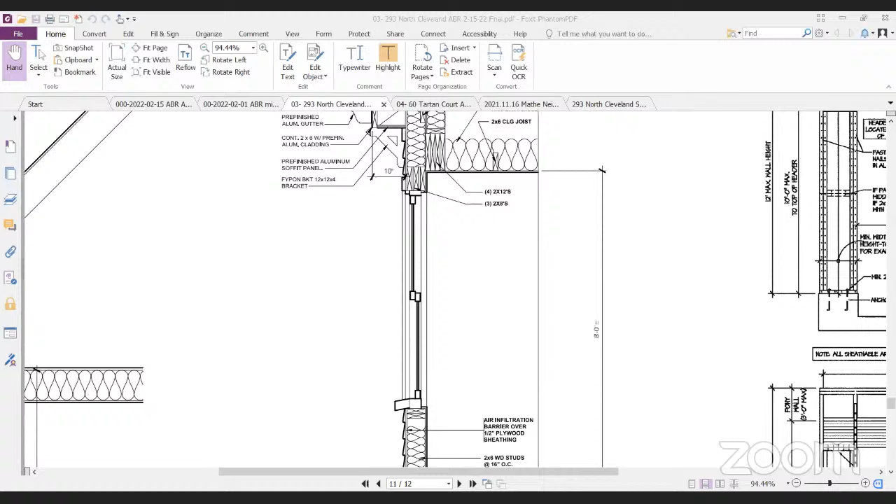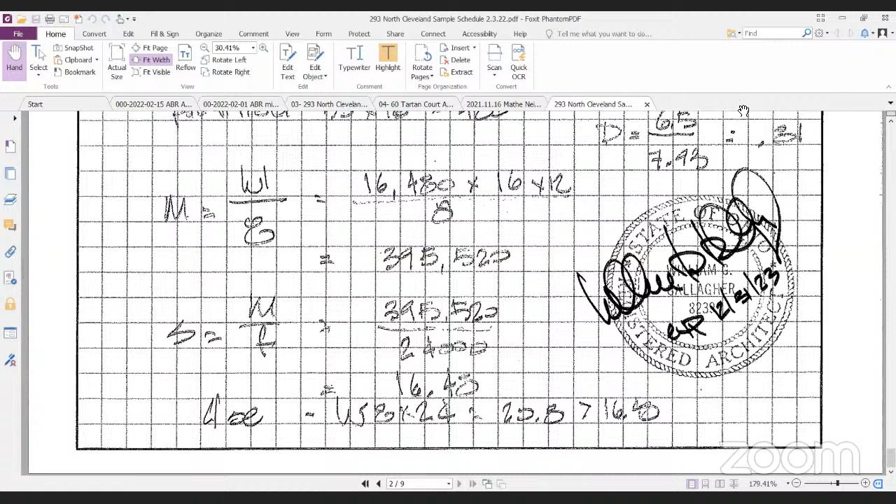Can I interject something? I'm not in the construction end of the business and haven't been for a while, but it seems like the cost of aluminum, when you add the labor to do the sophisticated bending and work you're talking about, might be offset by switching to an AZEK combination for your casings and corner beads, because AZEK makes a casing 1x5.5, 1x3.5 that has a built-in J channel to accept the siding. By the time you get done with all this aluminum, it might be cost-effective to consider doing this in AZEK, duplicating a sill that AZEK already makes with a J channel at the bottom to accept the siding coming up. There's all kinds of details the industry is moving towards to get rid of J channels and simplify details, and we're moving away from aluminum because combined with labor it's really expensive. So it might be a consideration.

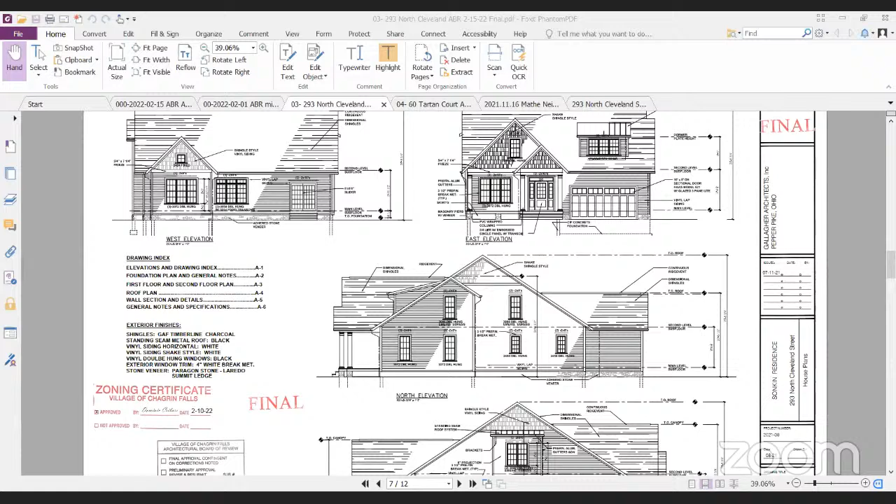Rodney, can you explain as a contractor why you prefer going with textured surfacing versus smooth? Bill, like I said, I've never used smooth vinyl siding. I don't know what my vendor who does my siding supplies and installation offers, I don't know Provia, I don't know what line it is. I've just never used it, so that's why I didn't want to speak to it.

I guess the comment is we can't evaluate that. If it comes in the same texture as smooth, that's a given.

Let me make a motion.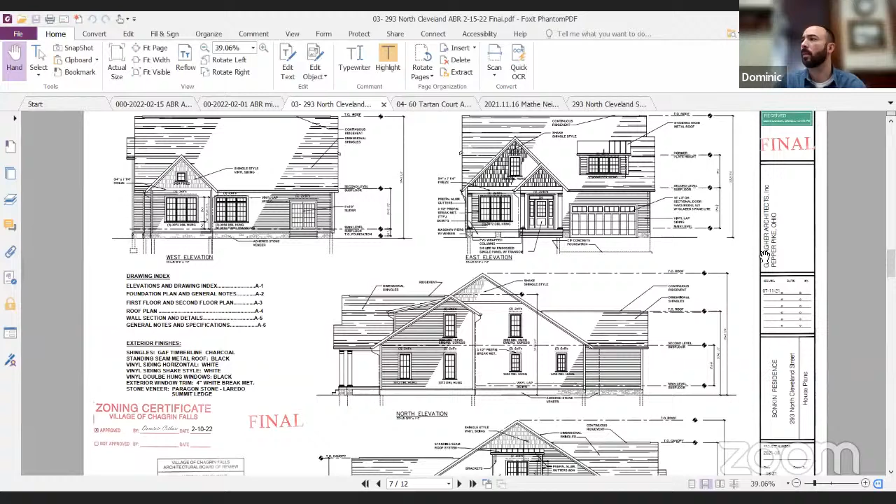I can't formulate a motion in my mind that I will vote for.

Jana? Sorry, I'm back. We're looking for a motion.

Well, are we approving it depending on whether or not Rodney comes back with smooth siding? No, I'm gonna try and do this, I'm gonna try and do that. I think I can do this, and I think I can do that. I have trouble voting for that.

Well, it's not clear that there's smooth vinyl siding available. You could say if available, we want smooth vinyl siding. Well, Rodney, I'm gonna guess, this is speculation 100%. I think Rodney has a supply source that he's comfortable with and he uses it. 100% correct on that.

Could we do a motion to approve the design but come back with the materials, or is that possible? Or to see if he can get that and make sure we understand all the rake trim boards and what he's actually using?

I would say this, that this house, you know, nothing can spend your money faster than your architect. They just spend your money like, you know, through a goose. But there's a level that we strive for, and I don't give a damn about the neighbors. There's mistakes all over town, and this is this house and only this house.

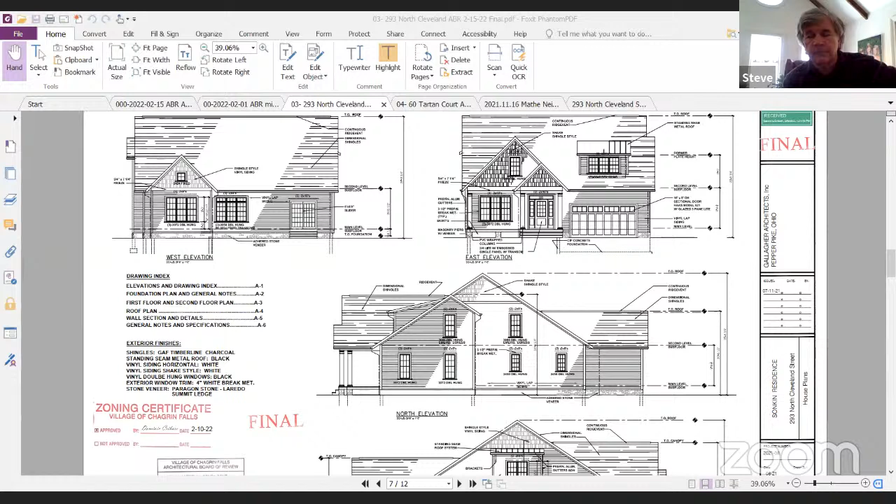Clarification of the installation ideas that were bandied around today. Do you have that comment? Agreed, we can do that.

I'm fine with that, I'll start looking into it. As we were sitting here talking, I was trying to get in touch with my siding contractor to find out about the smooth option. I personally feel that all the materials in the house, we want to use a high quality window, high quality front door, high quality garage doors. I'm sorry you don't like the vinyl, but I've built houses for these people in the past and they're not big fans of painting things over the years and replacing different pieces of siding. I just want to be comfortable on that street. So we will address the smooth issue, and I will confirm our installation techniques, and I'll confirm what we'll do on the sill as well.

Black windows are all the rage. We make that judgment house by house. And that's a consideration you should have if you're looking for us to approve it.

I second Bill's motion. Okay, so I have a motion by Childs, second by King. Lutz, aye. King, aye. Childs, yes. Okay, so that's approved with the comments regarding the siding installation, and that information will be given back to us.

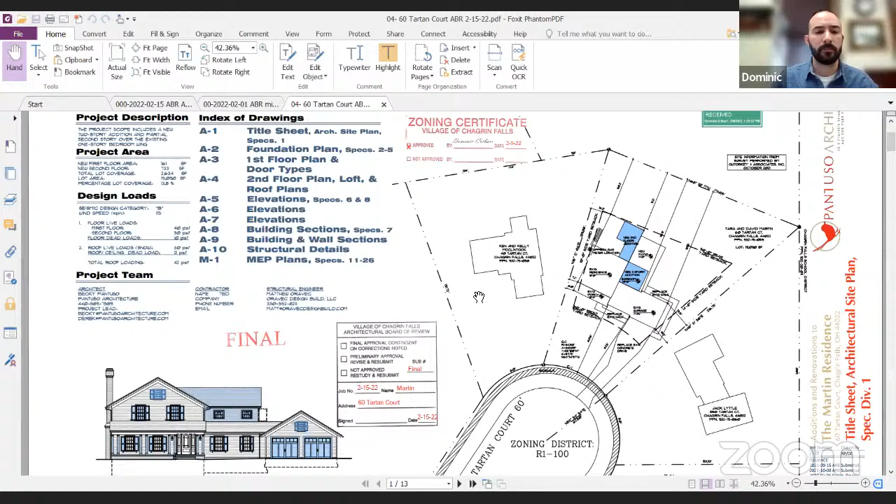You guys have seen this before. It was approved, you've seen it twice before. This is the third time. You approved it on a preliminary basis last meeting, and we've essentially made no changes from that initial design.

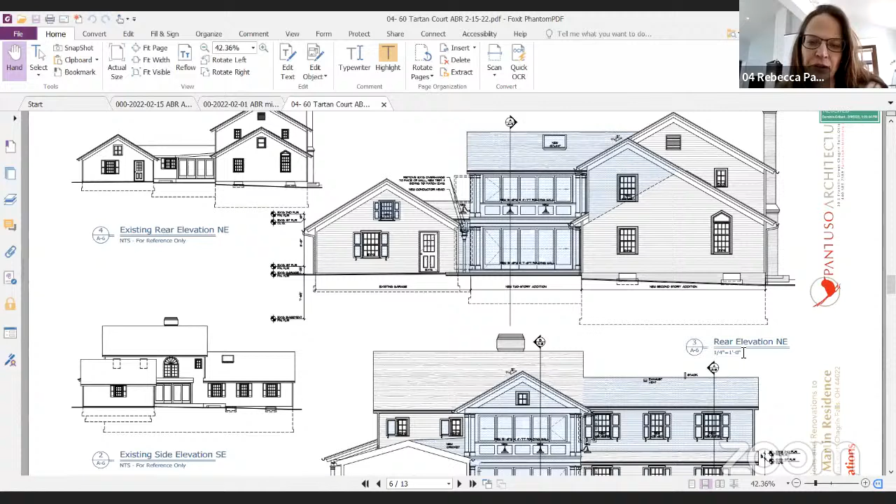Black windows, are they black windows? Move to approve. We should ask that question.

Did I hear a motion or a suggestion? That was a suggestion. Okay, Hey Becky, the windows, are they black or white?

They're white, Harry. Okay, thank you. I think I might make them red just for fun. Yeah, we need a longer meeting.

Move to approve. I'll second it. Motion by Lutz, second by Childs. Lutz, aye. King, yes. Childs, yes.

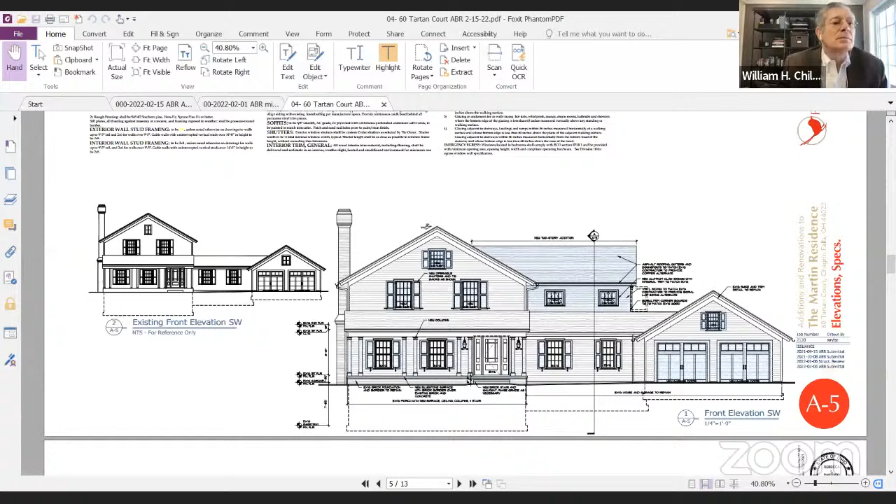Thank you. Thank you, Becky. Now, do we have any walk-ins?

I see one hand raised. There is a hand raised? Yeah, it's just taking a minute. I see it, it's going. It's just not going fast. I know, I'm just letting everybody else know.

So I'm here, Donna Mintz. Welcome. Thank you.

So I am proposing some replacement windows at 126 May Court. And in the past, if I'm keeping the same size, the same color, the same operation, and the same grid pattern, the projects have been administratively approved. And as I understand, there has been many projects that did not conform, and so it's creating a problem for the Architectural Board of Review because the administrative approvals are no longer effective.

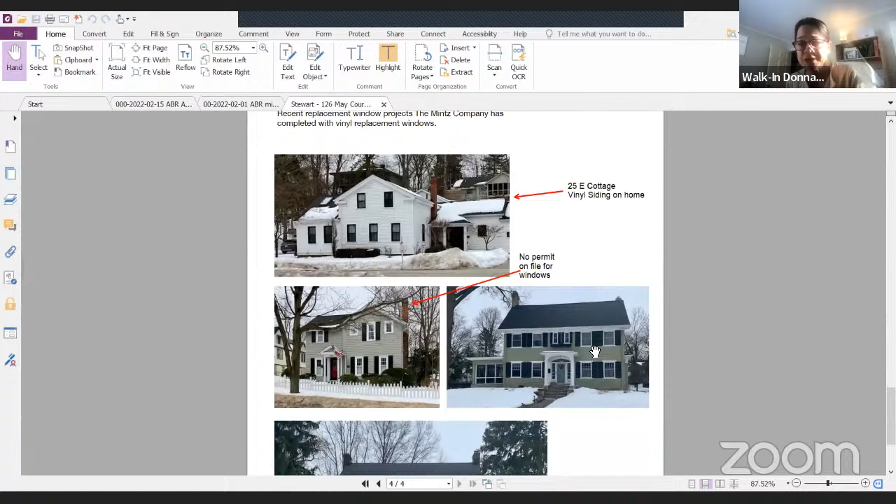And then these are homes that were done with the vinyl windows. These last two are not in Chagrin Falls, they're this green one in Shaker Heights, and this red one. Yeah, they're on Broxton in Shaker Heights. We've done many houses with the vinyl windows. I was just trying to show homes that have, I mean, Shaker Heights is also very particular about the look of their homes, and they don't have any problem with our window or our installation.

We pride ourselves in doing an aesthetically pleasing job with very, very close attention to detail. And we've gotten many nice reviews and accolades for our work.

So are you the homeowner, the architect, or the contractor, or? I am the business owner, we do the windows. So I purchase the windows, I install the windows, and I consult with the customer to determine what products and styles we're going to use.

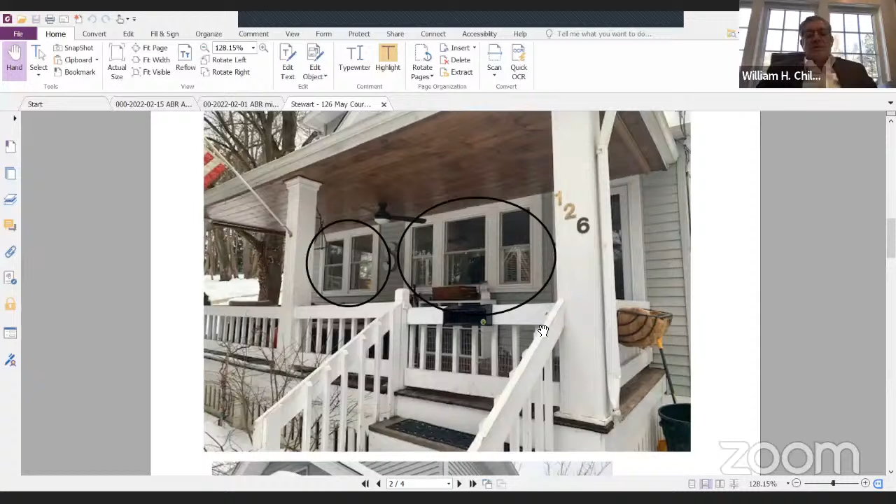And these windows originally, are these wood, or what are the materials? These are string and pulley windows, wood windows. Okay, I think what would be important is to know the width of the sash and the height of the lock rail, if it's consistent with this window. I think it'd be good to submit the specifications so that we can actually see the window. Does the vinyl window have a miter joint or a butted joint?

It's a miter joint. Okay. Does the original have miter, or are they butted, correct? The wood windows, I believe those, yeah, they're probably butted.

I guess, I don't know, Harry, does this house need a historic significance report? This one had one done in 2014. Okay, I mean, was it the same idea of putting vinyl windows in? Did they have - now they added an addition on the back. Oh, I mean, I would suggest, is that protocol to have the prospectus do a historical report to see if this has an adverse effect or not on this home?

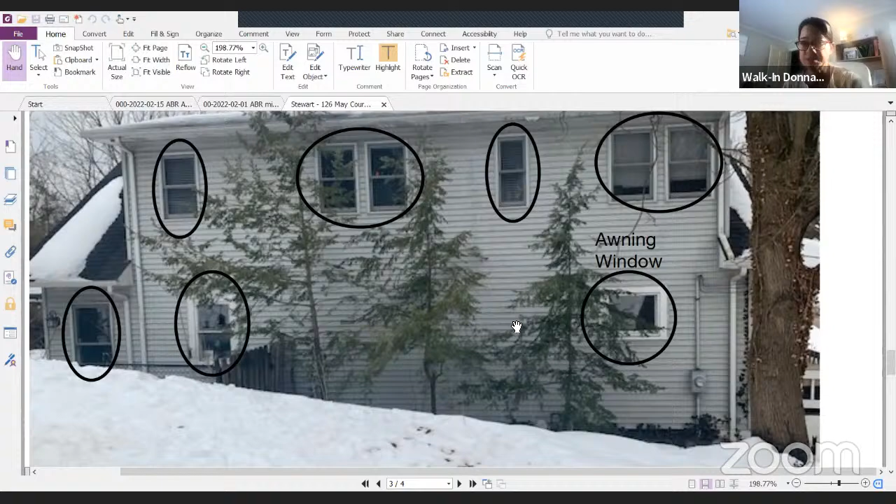I don't know how old this house is. Are you familiar with where May Court is? It's really tucked away in a very quaint little spot, not on any walking street front. A lot of you can't even see it - and I'm not saying you'd put in something inappropriate because it can't be seen, that's not where I'm going. It's just that this is such a huge improvement for the draftiness of the home. It's a young family, and they're looking to do something while their children are young, to keep the house energy efficient and affordable for what they see as an appropriate budget for this project.

There are so many vinyl windows in the village, in homes that are historically significant.

Yeah, I'm with you, I totally agree with everything you said. I just think we should do the same protocol we've done for every other applicant that's come before us. I'm just saying we've never had to do this before for windows. This is the only time - when I'm keeping the same size, the same color, the same operation - there's never been a time I've had to go before the ABR. So the precedent has always been that if you're replacing your windows using the same opening, you're really not changing anything. You're just adding to the energy efficiency of the home, and making the windows operable.

These windows don't even operate, they stick. This is going to add to the functional ease of the home and make it more livable, more enjoyable. And they're going to be beautiful.

Sure, I totally agree with most of what you're saying. This is the May Court extension - May Court is an L-shaped street. It goes down, takes a right into what's not really a cul-de-sac, it just ends there. I've owned two houses on May Court, and I own the one more or less across the street.

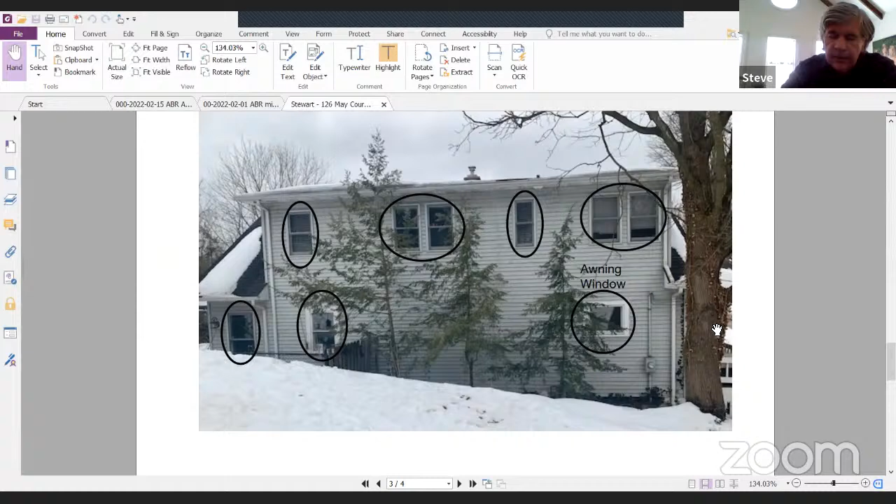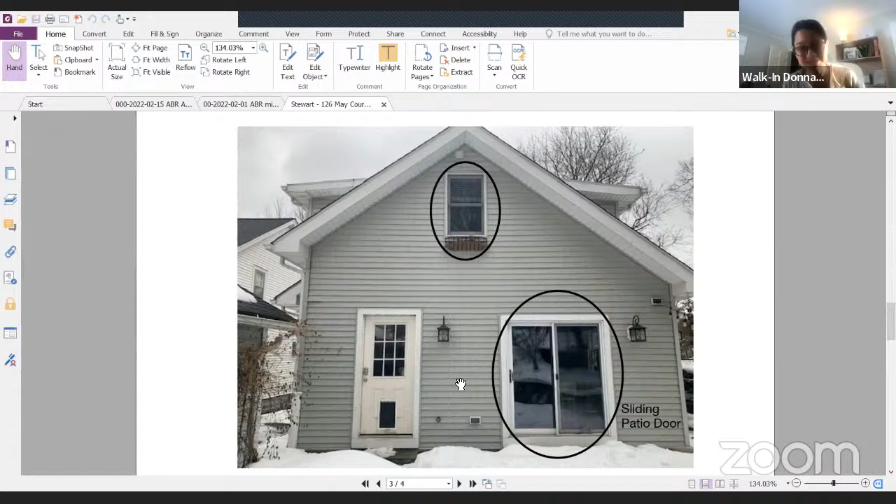I think most of the houses on the street were built around 1929, so I'm assuming it's in that ballpark. That addition - from what I just heard - has 5-year-old windows, 6-year-old windows. So there are about 4 windows that aren't being replaced, just those on the main house.

Our goal is to have a cute house like that remain a cute house like that. That's our goal. We do that. Okay.

I move to revise and resubmit, reaching out to Prospectus... There's no motion, she's just walking in for instruction. That's right, I'm sorry.

Yeah, if you could give us your specifications and let us look at the actual window - how tall the sashes are, how thick the lock rail is, and what it looks like. So would you like me to deliver a sample to the building department? You could do that, or don't they have drawings? I'm assuming they have specifications of the window. Yes. Even looking at the specific product. Yeah, but what's actually going to be put in here?

Donna is on the agenda for the March 15th meeting for this, so we can get the HSR updated, and she can bring any of those drawings and submit that stuff to us.